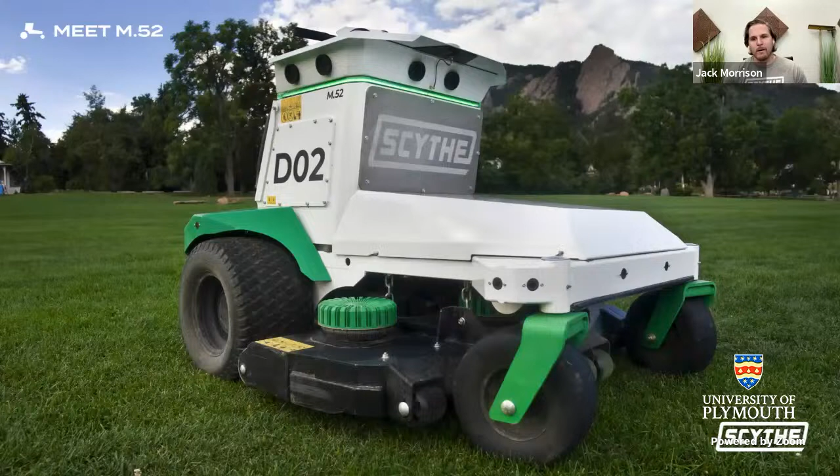So let me start by introducing you to M.52. Designed in-house and built from the ground up, M.52 is specifically capable of helping commercial landscapers who maintain these incredibly frequently visited outdoor spaces, like parks, HOAs, fields, schools, to get more done with the crews that they already have. It looks a lot like any other stand-on commercial mower that folks, especially here in the US, may have seen cruising around their housing development, office park, or school. It's got a 52-inch mowing deck on it, kind of the workhorse size machine in the US.

It's applicable to a broad set of use cases, from fields to apartment complexes, backyards, all of these different areas. It can mow well over 8 hours on a single overnight charge, and has this design that, like I said, is familiar to landscapers. They know how to hop right on it and start mowing manually or autonomously with a really simple, intuitive user interface. Now, M.52, of course, the big value here is it mowing on its own.

It uses a combination of computer vision, machine learning, and a whole bunch of robotics approaches to identify and navigate around obstacles, to plan its path around a mowing area, and to help landscapers not have to think about mowing while they go do the rest of the work on a property. It'll stop for people and pets, but go around trees and poles, enabling landscapers to just get more done.

That's really what it comes down to. Our job is to help landscapers save time. We want M.52 to take care of the mowing so that the crews are freed up to perform the more complex, higher value tasks on site—edging, trimming, picking up trash, planting flowers, dealing with the hedges. These are all the things that make a property shine and let landscapers show off their abilities, doing the more human part of the job of crafting a great space rather than just turning tall grass into short grass. Mowing is boring, frankly. We should have robots do it instead.

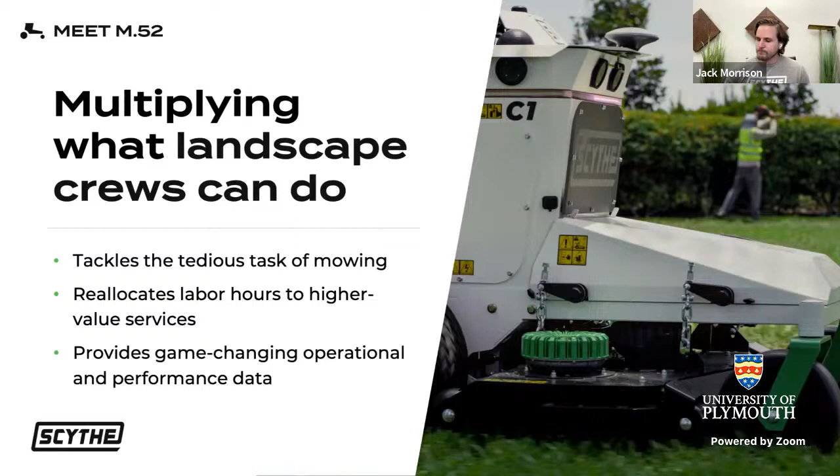Now I'm going to skip to a little video to introduce M.52, because robot videos are way more interesting than me talking, and then we'll get back into it after this.

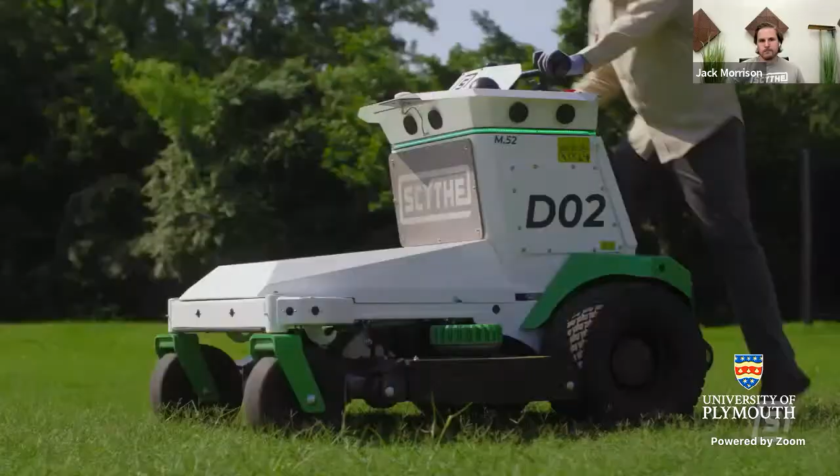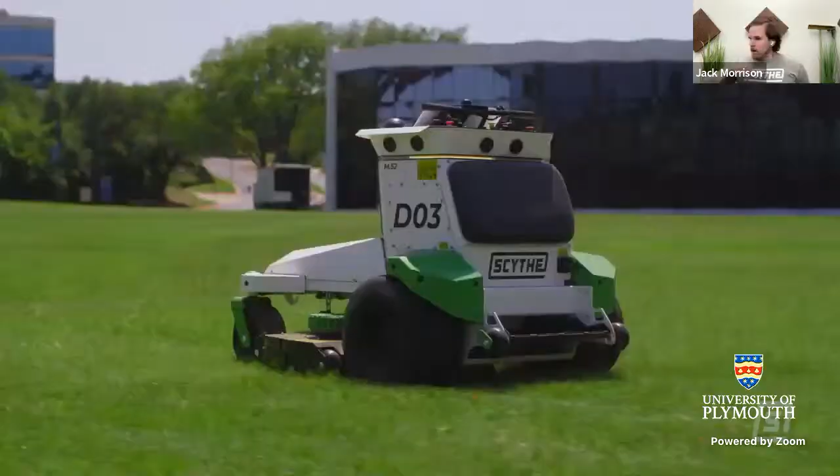Say hello to the next generation of mowing, built by Scythe. Say hello to M.52, the industry's most advanced autonomous commercial mower. M.52 is smarter than ever. An improved sensor suite and advanced AI allow it to see and perform like a human operator. Now your crew can finally focus on the higher value tasks that leave properties looking their best. It's important for us to stay innovative because it gives us a chance to really maximize what we're able to do on a property, to help with the efficiency and the quality of work we can give our clients, along with maximizing the volume we can handle in a day.

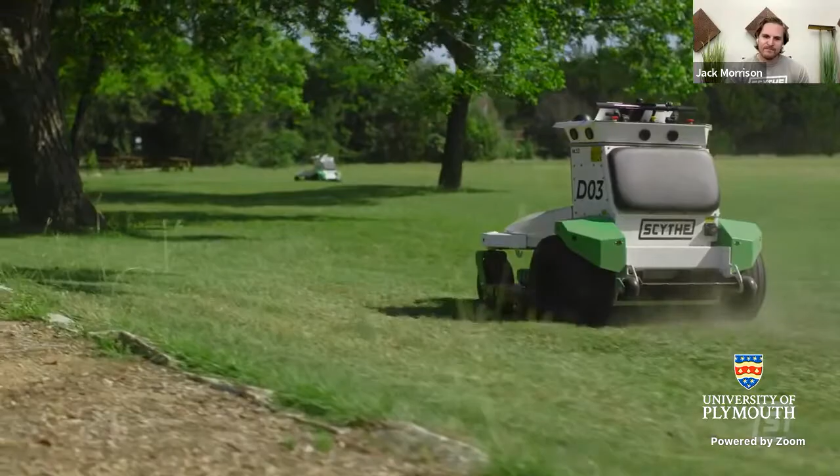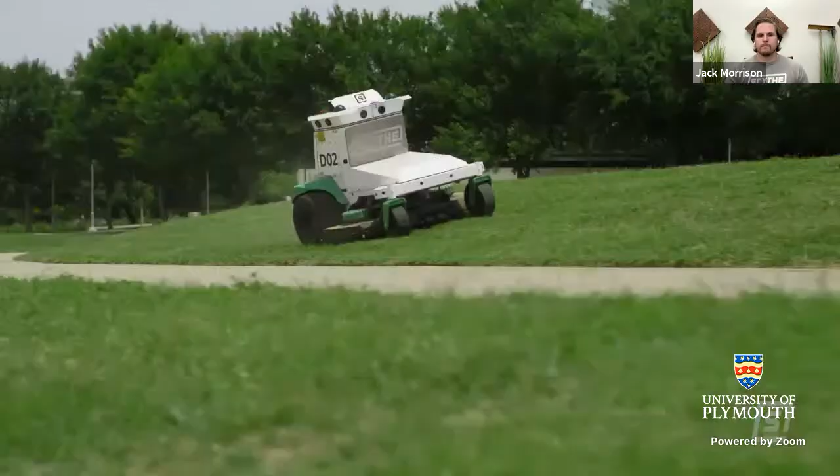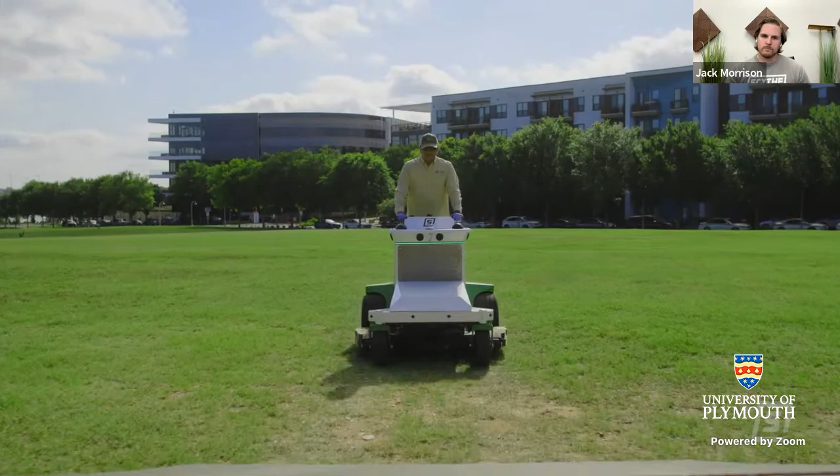M.52 navigates complex properties like a seasoned pro. It handles contours, tackles slopes, and automatically adjusts mow patterns to deliver your customers a cut above the rest. An all-electric drivetrain keeps it out of the shop and in the field—no fuel, no maintenance, no downtime. Using Scythe robotic mowers is allowing us to do more volume of properties because our guys can finish the detailed work a lot faster and move to another property. This new era of mowing means doing more with the crew you've got. It means all-day power without pollution, and above all, it means a perfect cut every time. Mow more with the next generation of Scythe.

All right, so there we have it. That is M.52, the lightning introduction to it.

The last piece before we get into the tech part is that the point of building a robot is to get lots of them out there and help do more. To do that, you have to take into account how you bill for the robot. Selling a multi-$100,000 autonomous mower wouldn't be very useful because not many landscapers could afford that. When we talked to a lot of landscapers and heard how they felt about their mowers, one of the things we heard over and over was that they were sick of paying to fix machines that would just keep breaking, and tired of becoming what they called iron collectors instead of focusing on their real work.

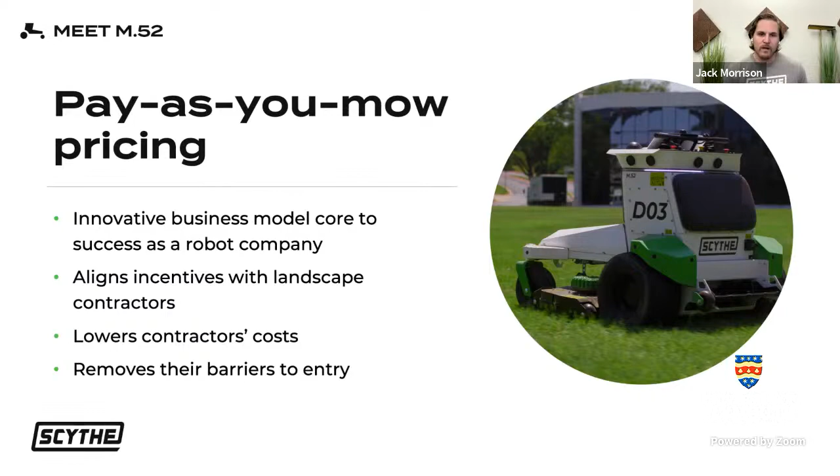They end up with these scrap heaps filled with mowers, parts of mowers, and entire mowers after only a couple of years because existing gas mowers break down so much. It occurred to us that all of these innovations in M.52 also unlock a better way to bill. We heard our customers' pain points and turned the industry's traditional—and we feel strongly misaligned—parts and service model inside out. So instead of charging customers when a machine breaks, every time the belt breaks or the engine needs an overhaul, we bill based on the work that's actually getting done out in the field. For every acre M.52 mows autonomously for a customer, we aggregate those over a couple of weeks and bill based on how many acres the machine mows. That builds a much deeper, trusting relationship that's vital for introducing something new and innovative into a word-of-mouth legacy industry like landscaping.

To build a machine that can stand up to the demands of commercial mowing and the high expectations of our customers, we had to design for critical considerations and constraints these robots face in unstructured outdoor environments. This includes the durability demands that influence our hardware design decisions, the dynamic and dirty environment that influences sensor choices and our perception development strategy, and the power limitations that influenced our approach to computation, from the processors and boards we use to the programming language for our software.

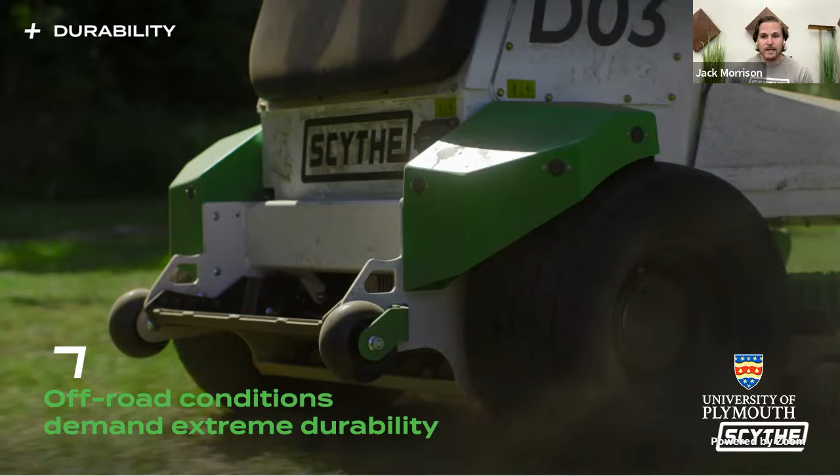So we'll kick it off with durability. The challenge here is that off-road robots have to be rugged enough to stand up to both their outdoor environments and the tasks they're doing. They face tough terrain, steep slopes, intense and variable weather, and the stress of daily operations, being a machine that's not only driving itself autonomously, where we have some ability to be gentler and optimize for the lifetime of it, but also doing manual operations.

Landscapers are not kind to their equipment. They've got a job to get done and don't really care if the machine can't hold up to it. They've got to go fast and get it done. These machines face uneven land, hidden rocks, even different types of grass that can wear on machines differently. Sandier soils will wear down mowing decks really quickly, for instance.

Incredibly hot sun out there, 100+ degree Fahrenheit temps, over 40 degrees Celsius. Unexpected downpours that will flood everything around it, tons of mud. They've got to get on and off trailers repeatedly, up and over curbs, and all around the properties they're operating on.

Now, of course, this isn't exclusive to autonomous machines. This is something existing gas mowers have to deal with as well, and they just don't really do all that well, frankly. Sort of surprising to us. A commercial mower, for context, can cost up to $25,000 off the lot. They only last a couple years, maybe 3 years max, 2,500 hours of runtime.

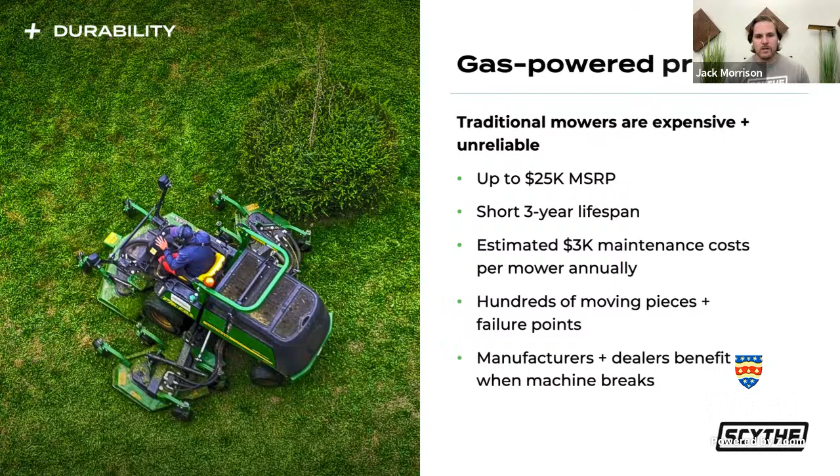And that felt wrong to us, so we wanted to change that. Going electric is one way we have completely flipped the game here. We've got about 1/10 the moving parts. We've got 3 blade motors, 2 drive motors, and the deck goes up and down. That's about all the moving parts, along with the casters on our machine. Almost none of that needs ongoing maintenance.

We've seen in the automotive space how incredibly robust, durable, and maintenance-free EVs can be. I've got an electric vehicle, and I think I've taken it to the shop once in 3 years. It's pretty incredible compared to the gas car I had that had to go in every 6 months, probably.

So just going electric allows us to avoid a whole bunch of the durability problems that would slow down our robots, keep them out of the field, and make it harder for our customers to get more done. Now, this isn't possible in every autonomous off-road application, since many need all the power and runtime a gas engine can bring in terms of quickly refueling. But it's something I'd strongly suggest folks consider as you look at taking an autonomous solution off-road, because the durability is so much better.

And then there's this climate angle of just being better for the earth. If we're building these machines to do things off-road and exist out in the field, we want to help be good stewards of that space, and eliminating emissions is a great start to that.

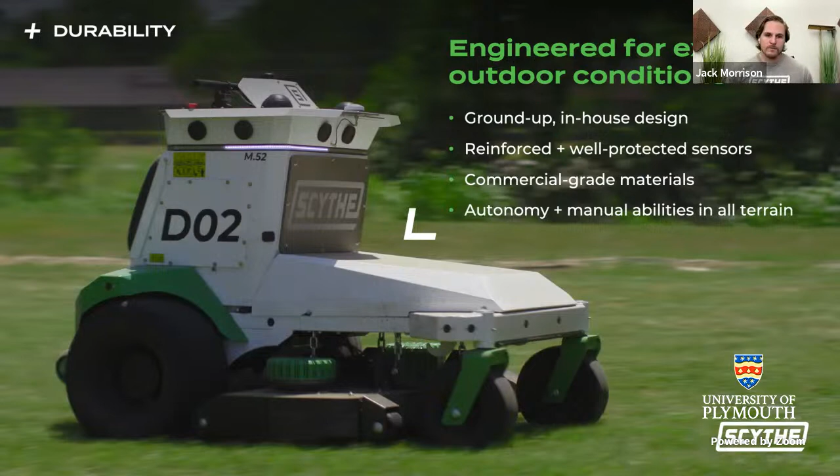We use what we consider commercial grade materials, really thick steel that can last through all of these environments. And then, we want to build a machine, and we test that the machine can do its autonomy and its manual abilities across all sorts of terrain that our customers might encounter.

And of course, when you're considering durability out in the field, testing is a critical part of maximizing that ruggedness for any off-road robot. In order to build a machine that before we fielded it was ready for the rigors of commercial landscaping, we've put it through some pretty extreme environmental testing to ensure it will stand up to the task at hand. This includes extreme terrain testing, accelerated lifetime testing, thermal and environmental testing, like soaking these machines to make sure that they really are water resistant, and then pointed tests to look at individual possible points of failure on the machine and make sure that we've covered them to the extent that we expect them to see anything out in the field.

We've made some design choices early on, built on best practices to help these machines from the time they're built survive out there, meeting IP66 standards to prevent dust and water ingress, using networking standards inside the machine for data transmission, like for the cameras, FPD Link or GMSL instead of USB or Ethernet. These are automotive grade camera streaming protocols that rely on really well-tested coaxial cables and are incredibly robust to noise and to all of the sorts of things that happen in an industrial machine.

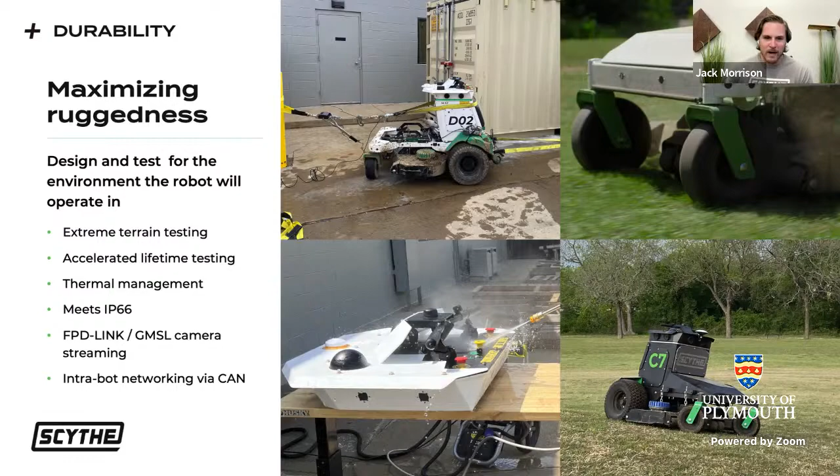All right, so the second consideration I've got here is around sensor selection and perception strategy in these unstructured outdoor off-road environments. Of course, your machine has to be able to understand what's around it and do that really robustly to operate safely in off-road environments.

And the challenge is that outdoor environments are not sitting still. They're dynamic, they're dirty. Nature's always changing. The trees are growing, the branches are waving, leaves fall, colors transition, water shows up, and then sometimes it goes away. And we need sensors that work in all of these possible operating conditions, including those with pretty stark lighting differences, dusty or grass-filled air, and abundant dynamic obstacles.

So to perform in these conditions, our real-time live perception is a must-have, right? You can't offload this compute to the cloud because you'll never have a reliable and timely enough connection to do this. So all of our compute runs on the bots onboard, and things like persistent pre-mapping, like what's often used for autonomous on-road vehicles, just isn't nearly as effective because these outdoor landscapes are always changing. It's not like we have static buildings that we can map against.

Trees are being trimmed, especially in landscaping. Branches are growing, leaves are falling. All of these things mean we need to deal in the perception domain with changing things as they come up.

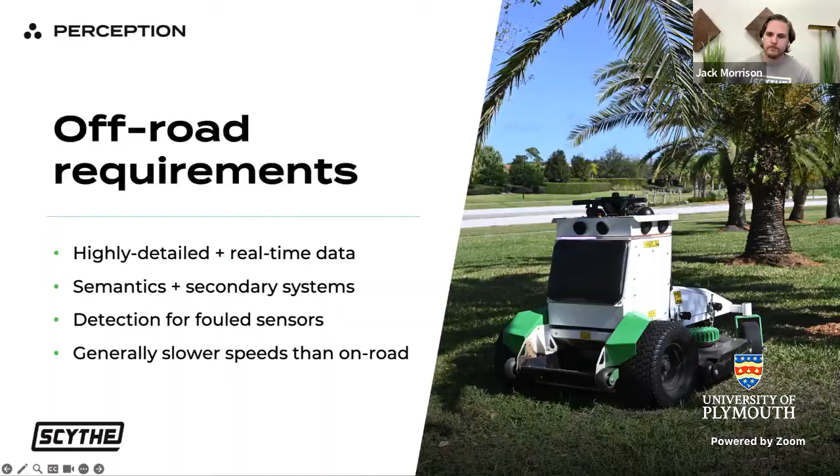We found computer vision to be the most productive and beneficial approach for perception on M.52. But we considered others. We've got 8 high dynamic range cameras on this machine. It performs really well for us because it can be really resistant or robust to fouling, like dust in the air, dirt flying around, grass getting clipped, and from a cost perspective is much more appropriate for the type of machine we're building. This is not something we want to cost hundreds of thousands of dollars to build.

Even the cheapest LiDARs today can be $10,000 plus for the rich geometric information you want from an autonomous mobile robot. Whereas our cameras cost a fraction of that for all of them combined, and provide us not only structural data through geometric computer vision methods, but also rich RGB information that can feed into all of our semantic perception abilities. And you can't just take any old cameras off the shelf.

In indoor environments, a 60 decibel dynamic range is typically okay—you have usually pretty uniform lighting. But if you think about being off-road and out in a tree-filled area, you can have really stark lighting differences, where you've got shadows that are incredibly dark, and then you're staring simultaneously right into the bright sun. That means you need incredibly high dynamic range cameras. Instead of 60 decibel dynamic ranges, our cameras have 100 to 120 decibel possible dynamic ranges, which allows us to resolve objects both in that sunlight and in that dark area simultaneously.

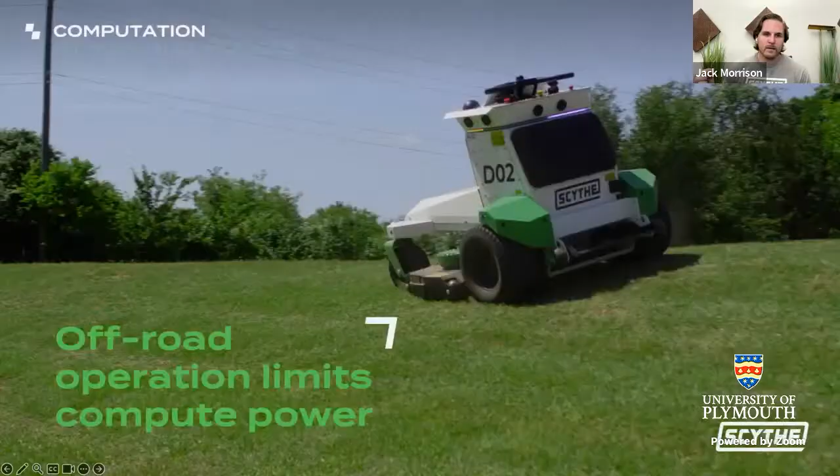And that compute power is pretty limited because of some of the demands around power budgets. We'll talk about this now. So we really had to tailor everything about our software processing to the task at hand. Not only the compute boards that we're using, the actual embedded computers, but also the software, to keep in mind the limits to the power that we've got.

These off-road applications can take an incredible amount of power to do the actual task at hand. If you're an indoor mobile robot, your power consumption is actually pretty light. You're on a relatively smooth floor, sort of moving yourself around, maybe operating a small robot arm if you're a mobile robot. But there's not a whole bunch of resistance to what you're doing.

When you're off-road, if you're doing things like cutting thick grass or harvesting or trenching or bulldozing, that uses an incredible amount of power just to do the task, not to mention actually computing all of the autonomy abilities that you have to enable to do that task.

There's also often a limited ability to charge nearby when you're off-road. Of course, there aren't outlets everywhere in a field. You can't sort of run a cable to it or do DC fast charge in the middle of a soccer field. And so that can be really challenging for emissions-free, fully electric machines to both be able to do the task at hand, do it all day, and meet their customers' needs while also being autonomous.

And so instead of packing some beefy desktop computers, off-road robots often need to make do with substantially lower power devices.

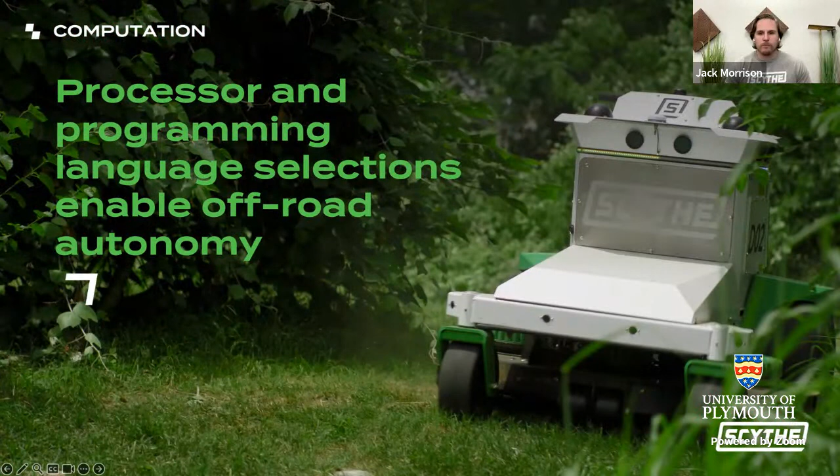All right, just wrapping up here, by being really strategic with your software processing and your programming language selections, we think off-road robots can be just as capable as indoor or on-road AVs in the autonomy space that they're operating. You just have to be really intentional and think ahead to cover all of that.

Now, I talked a lot about M.52 and what we're doing at Scythe, but I think there are amazing other opportunities for folks to build off-road applications, from agriculture to construction and mining to various types of off-road mobility. There's so many things and so many important applications that could use the help of autonomy that I'd encourage folks here to think how they can get involved and how they can bring more machines to these important areas of the economy and of the world that need help automating and getting more done with the people they already have.

Whether that's because they need to help people be safer in these environments. It's dull, it's dirty, it's dangerous. The 3Ds we all think of in robotics, so many different opportunities. They all have unique challenges for robots, but I think those challenges will really shape the solutions and the decisions that you make around things like hardware, perception systems, and computing to allow you to build better, more capable robots. We'd love to stay in touch with everybody here.

As part of that, we came across the Microtransat Challenge, which has been a long-running competition, I think going over 10 years now, for small autonomous sailboats to cross the Atlantic Ocean.

There's some rules to that. The boats have to be powered by sail, no engines or motors. They have to be less than 2 meters long. And in order to complete the fully autonomous category, they have to have no control signals after they cross the start line. There have been successes in the unmanned attempts where someone has remotely controlled the vessel across, but the fully autonomous category is still up for grabs.

Loads of people have entered, DIY enthusiasts, academic institutions, commercial institutions, and it turns out to be really damn hard to make a robot cross the Atlantic. So we were inspired to give it a go.

And so we started designing a boat. We made it all up in Fusion, 3D printed it in sections. We learned the joys of doing 12-hour prints and then having them fail right at the last moment and turn to spaghetti. And we found out about the painful process of hand wrapping fiberglass.

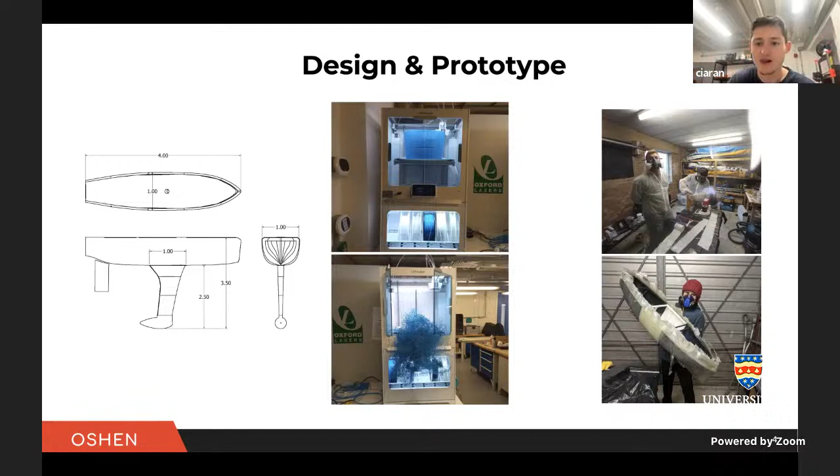Once we glued all these sections of the hull together, wrapped it in glass with some really nasty chemicals to put on that, we had a nice solid hull and gave it a lick of paint. And did some design of the interior parts.

As robots go, autonomous sailboats are super simple. There's only 2 real parts that have to move. You need to set your sail angle to the wind and you need to steer with your rudder. So we had some super simple parallel linkage, worm geared mechanisms set up to control those 2 parts.

We wrote some simple software just running off Arduino microcontrollers and gave it some tests on the local reservoir. And if this video is working okay, you'll see it sails super slowly, but kind of made it there.

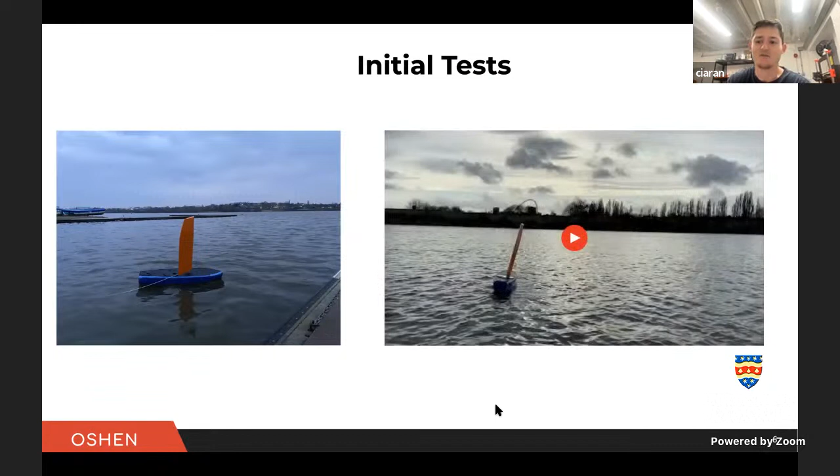You can see Wembley Stadium in the background, so we were quite pleased. We demonstrated a proof of concept, but we were pretty sure that this was not going to be crossing oceans anytime soon.

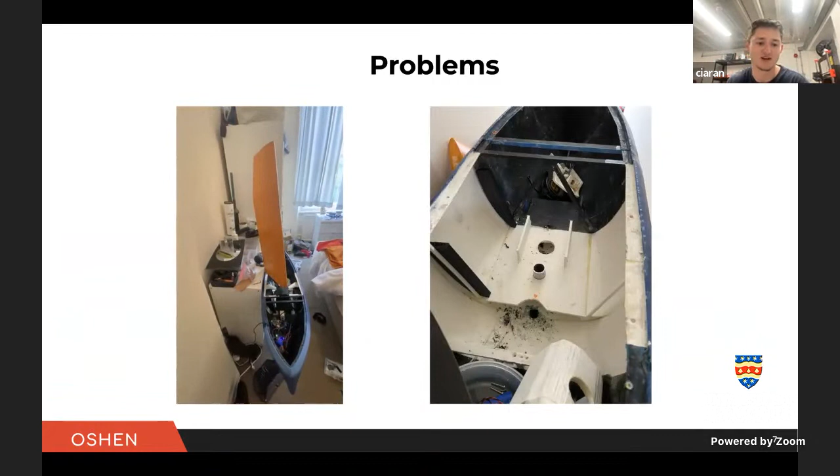Part of the issue was the weight of the thing. We left our 3D print inside this fiberglass outer, which made the sail incredibly heavy. Even with our 60-to-1 gear ratio on the motor, it just really struggled to turn that sail through the full range of motion. And the 3D alignment parts we had inside very quickly sheared and snapped off. So things broke pretty soon.

But we were inspired to give it a better go, iterate on that prototype, and still go for this Atlantic challenge.

It was around the same time that we also came across ocean data, types of data like metocean - things like wind, wave spectra, temperatures, pressures, weather effects - and then environmental data. You've got simple visual observations of the oceans, chemical sensing of the water, passive acoustic monitoring, things like that. And we found out that one of the main tools to actually get this ocean data was to use sensor buoys.

These are really simple passive devices, sensor payloads in a floating package. Right now you need to have a manned ship actually deploy these. They need to go out to an area of interest, drop them overboard, and then they'll last a few months in the area before they drift away with the ocean currents. So you get pretty poor coverage - these things will clump together, you'll have really sparse areas, and if you want persistent measurement in an area, these buoys will only last for a few months.

And the worst part of it is they're not recovered. So they go on to just litter the ocean, wash up on beaches, because it's too expensive to actually go and pick these things up.

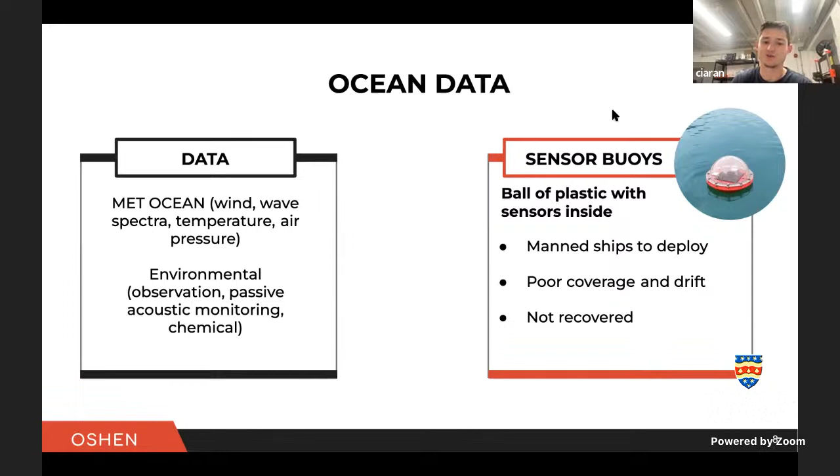And so we kind of realized there was an opportunity there to use these micro transat style vessels as ocean data collectors. We are not the first or anywhere near up there in making robot boats. Robot boats have been around for a while. But what you've got on the market today tend to be much larger autonomous ships, huge expensive assets with large power budgets and loads of expensive equipment on board. They're heavily regulated, have to be monitored by remote pilots, and they're just so expensive that you couldn't put them out in the same numbers as you do drifting buoys.

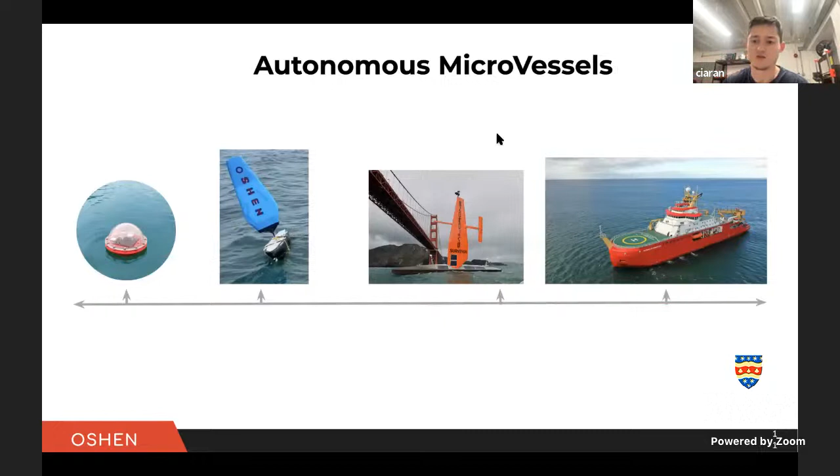And we want to design a system that is a lot more similar to your drifter than the research vessel. So the advantage of our system is that it could self-deploy. You could drop one of these things off on the coastline. Over many months it could find its way using just wind power to its destination, use the wind to stay in that area making measurements, until near the end of its life, at which point it'll be able to sail back for maintenance and won't pollute the ocean. The idea is that these are so small, only about 1 meter in length, that they could be deployed by a single person, and you could deploy them in large numbers.

At this point, we decided to move away from just doing the microtransat challenge as a project to going for things as a startup with more of a commercial aim. To start that off, we got some prize money from the enterprise lab at our university. We used this to grow the team a little bit, and we started iterating on new prototypes.

Importantly, we started going out to sea, which really put things through its paces compared to those reservoir tests. And we got things in up to a force 6 on the Beaufort scale, which was pretty nasty to be in on a chase boat.

One of the big things we did when we graduated is my co-founder and I put our savings for the year together and bought a small sailboat secondhand to both live on and be our base of operations for all the tech development.

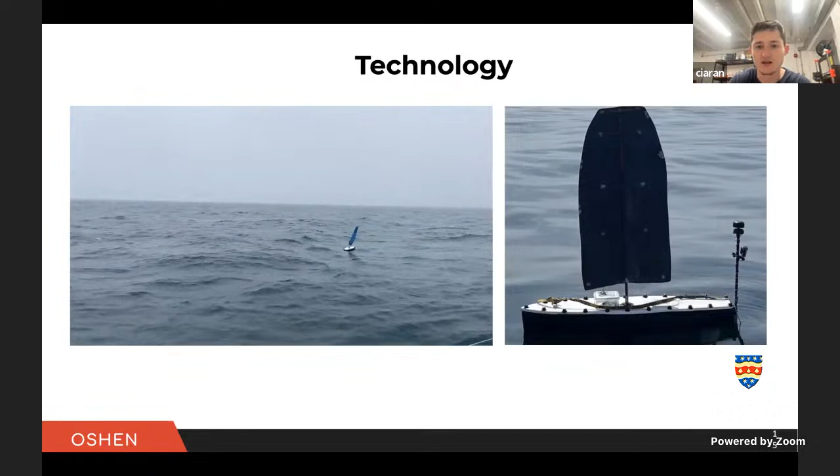What I'll do for the next part is I'll quickly go through the different aspects, and I'll leave it up to you guys to ask questions if you want me to elaborate more on certain parts.

So, chatting a little bit about some of the main challenges of making a sailing robot. On the face of it, as robots go, it's one of the simpler things you can make. There's only a couple of moving parts, and the sea is a particularly vast and empty space. You don't need advanced obstacle detection, SLAM, things like this. It's quite a simple environment as robots go to operate in. The challenges actually come in with making something that can last for many, many months consistently, confidently.

Part of that is in the power requirements. With the size of our vessel, we can realistically only have 40 to 60 watts of solar panel capacity on our deck, which really limits how much power we can use in our systems. That means the actuators controlling the sail and steering, being the most power hungry parts, we want to actuate as seldom as possible. So what we're trying to make is a system that is just controllable enough, that just barely gets where you want to go without using any more power than it absolutely has to. With the scales you're talking about on the ocean, things could be a few miles out - that's pretty good going in terms of getting to a destination, monitoring an area.

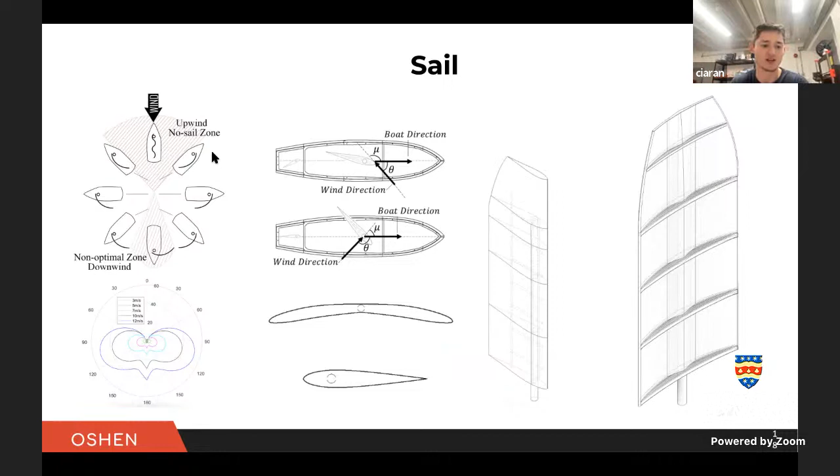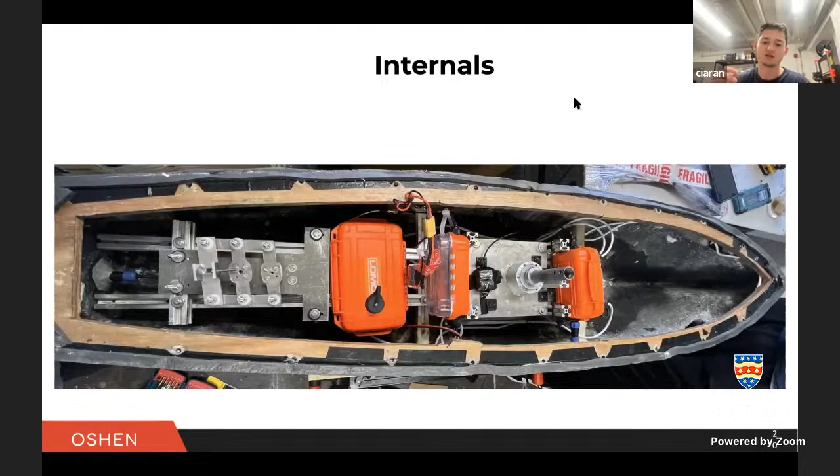Quick flow through of what the insides look like. We've got some metal frames this time, and the electronics are divided into 3 main modules, each enclosed in a waterproof shell, with further waterproofing inside that. Again, the 2 simple actuator systems that do the mast and the rudder. The microcontroller we're using is one of the STM32 ultra low power range - this thing draws almost nothing. It's absolutely crazy, in standby mode you're talking like nanoamps.

It's got a whole bunch of hardware timers, so you can put the thing in sleep and it will wake itself up when you have certain interrupts or after certain times. Importantly, it has 5 serial ports, which really helps when we've got all of our different sensors, most of which use UART. It's got built-in timers.

I love the watchdog feature. It's a fantastic thing to put in any project you're doing. If the watchdog isn't petted, it will reset the whole system, turn it off and back on again. And everything's built around a real-time operating system, so you've got all the different concurrent processes going on between the control system, reading the sensors, etc.

The 3 key sensors you'd find in an autonomous sailboat are knowledge of the wind strength and direction. So you've got your anemometer—we've got an ultrasonic one here, super expensive but quite robust kit. You've got some way to measure your heading, so you can use an IMU for that.

And we've actually been trying RTK GPS in a moving base mode. If you're not aware of what RTK GPS is, it's basically super accurate correction data applied to GPS.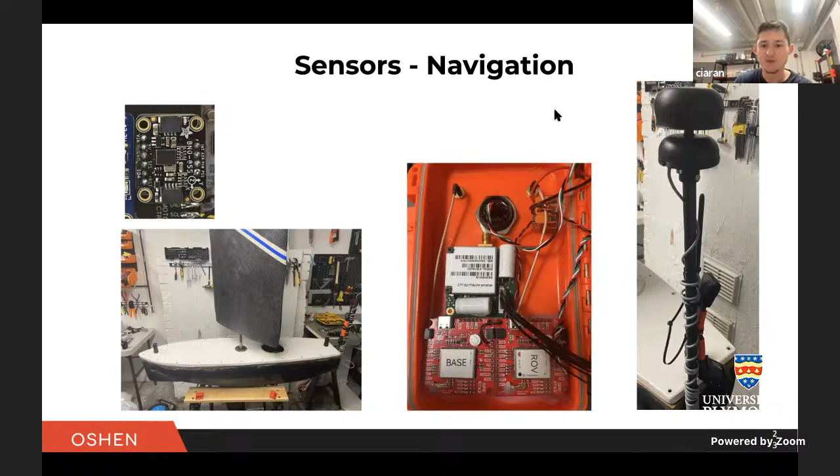And then the third part of things is your GPS, obviously, just your position in space. So those are the core navigation sensors.

And then we've also got our data sensors. Important things are our temperature and pressure probes, which measure the surface temperature, subsea temperature, air pressure, and humidity.

Our grant funding most recently is for this project where we're doing passive acoustic monitoring. We've put these hydrophone underwater microphones on our keel, and we're listening out for cetaceans—dolphins, porpoises, things like that—and logging that data.

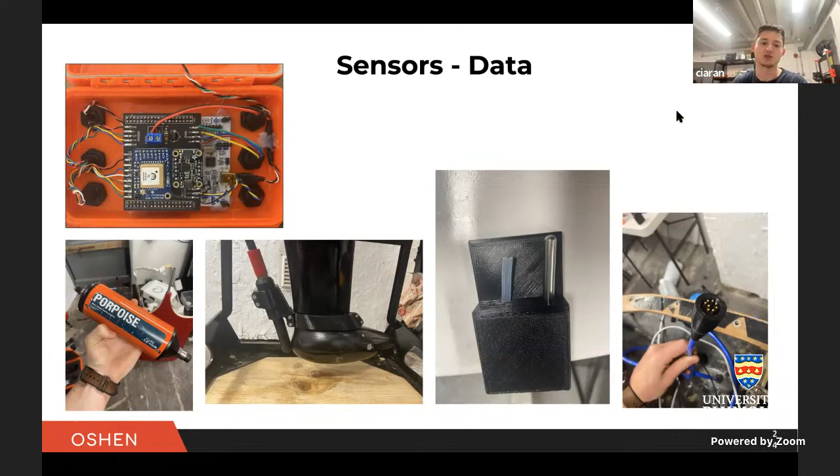And we've also got our IMU on there using that accelerometer data to measure wave profiles. These are super valuable to people running commercial shipping and offshore industry—they want to know exactly what the wave frequencies and wave heights are.

A little bit about the stability and robustness considerations. So everything's mega waterproofed. This is the chip that we actually plucked out of one of our vessels. This was inside one of the waterproof enclosures, inside the waterproof hull, and it never got even close to water, but the humid, salty air has managed to corrode all the terminals. So yeah, the sea is a pretty nasty place, and there's lots of considerations that go into sealing and waterproofing things.

A little bit about the stability considerations as well. There was a lot that went into the physical design of the boat. The simple one is the roll stability—the lead keel on the bottom makes sure that it always stays upright, so if it capsizes, it'll always find its way back upright.

What's a bit more complicated is the yaw stability. You've got to look at the aerodynamic and hydrodynamic forces acting on the vessel, essentially trying to make it stay in a straight line as much as possible by itself.

Okay, a little bit on the control system side of things. This came out of my co-founder's master's thesis. She was looking at applying standard algorithms like A* with a custom cost function to find the optimal path from A to B in the oceans.

Obviously, such a small vessel is going to be affected by the wind and the currents, so you have to make sure they're acting with you to get you where you want to go, avoiding particularly turbulent areas of the ocean. This happens offline, generates a series of waypoints, which can then be fed into the next stage of the vessel control.

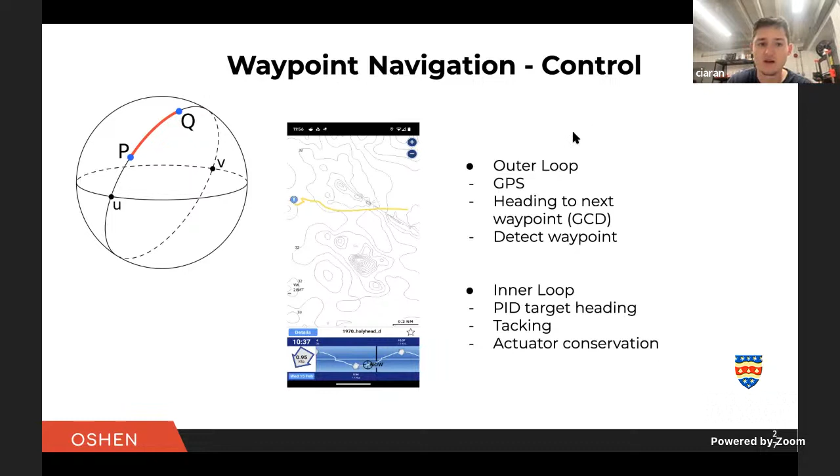Next up's the power system. We're trying to run such an incredibly low power system, our target is about 3 watts. The biggest consumers of energy are the motors in the mast and the rudder, so we're trying to actuate them as little as possible, which means trying to design a vessel that's just inherently as stable as it can be.

We have capacity just now for about 40 watts of solar energy, which means that assuming about 2 hours peak per day, we can just about get in what we put out. We've also got a really large set of battery packs that mean we could keep going for a week without any solar energy.

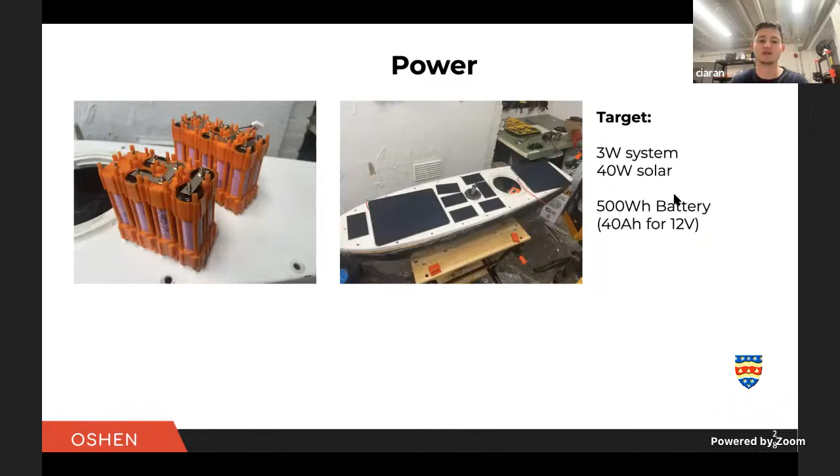A quick note on the telemetry. There's 2 sides of this. One part is about getting the data back, we're using Iridium SBD for this. If anyone's used that before, you know it's really small message sizes, you're talking about sending under a kilobyte. There's about 5 minutes latency on it as well, and it's quite expensive to send messages, so it's really not ideal for debugging the system.

We've built a dashboard that integrates with the SBD messages and will display the data and the position of the vessel. For the debugging side of things, we've got a LoRa link, sending as much information as it can on the internal status of the system, any warning messages, things like that. The LoRa has a range at sea of just under 10 kilometers.

So you can be on your chase boat, you might not even be able to see the vessel, but you can get information back about what's going on. And we've got a little relay station that we've built that just translates the LoRa information over a Bluetooth link, which means you can connect using your phone.

Up ahead, we've got plans for our first Beyond Line of Sight mission this month, which is a bit scary, sending her over the horizon, but it's what she's built for, and looking forward to seeing how it goes. Next month, we have our passive acoustic demo.

This is the end of our grant funding, and we're going to send it into an area well known for dolphin populations and see what we can pick up. We're quite optimistic because our vessel is sail powered, it should be super quiet compared to other solutions in powered vessels that are obviously going to interfere with the dolphin sounds.

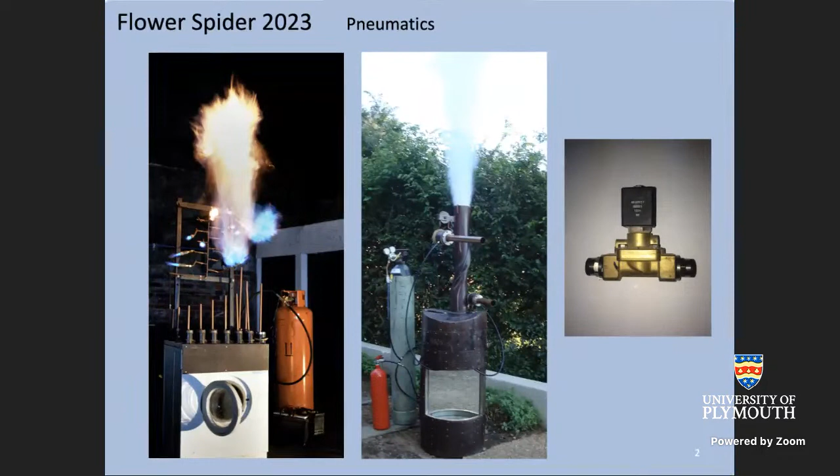The idea came to me, which was to create an autonomous moving floral animal. I really liked Jeff Koons' piece, but I thought it would be cool if it could move. And then I also thought it would be very cool if it could actually walk rather than just move.

So the idea was, okay cool, it's going to be a moving floral animal. It's going to go global, visit botanical gardens and parks globally, and be able to wear suits that have been grown for it locally wherever it went. The idea behind that is to bring awareness to the edge of nature and engineering and the way we interact with the web of life. But also there's a secondary thing, which is to inspire and educate around maths, electronics, programming, and art. I left robotics out of that stage because I wasn't really aware of robotics, as will become clear.

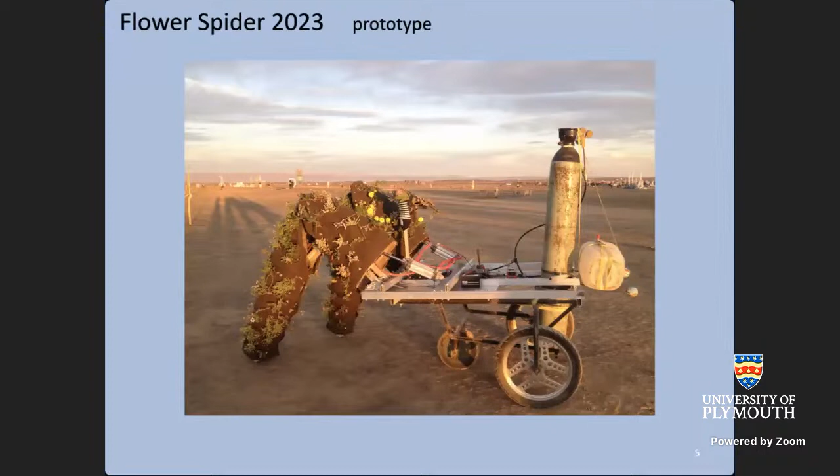So then I got a bit more serious, and I started to build the spider up towards mechanically what it would look like today. That was drawing on my engineering background, and it went quite successfully. I got it to this stage.

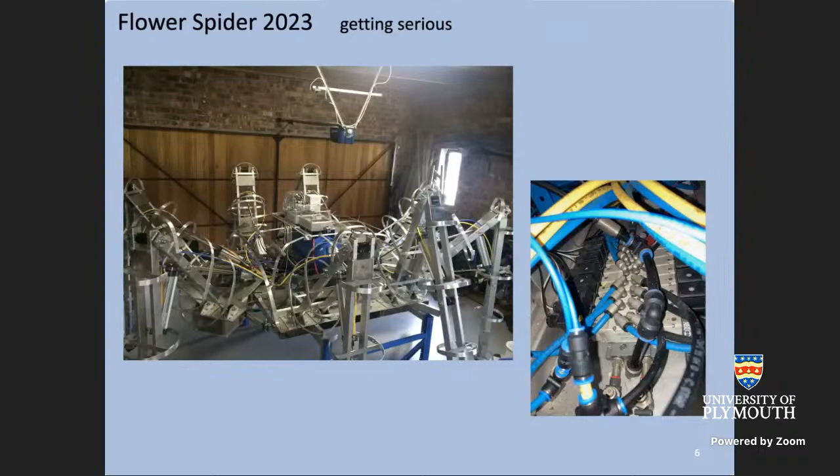Mechanically, it was running really well, and it could move in the way that I wanted it to move. The pneumatics worked. I put pulse width modulation control through a couple of Mega 2560 chips on a custom double Arduino, because one Arduino couldn't do what I wanted. I ended up with this complete spider, which mechanically, and from a gait perspective, could do what I wanted in terms of walking.

It could be covered with these suits, which I was growing at the same time, and bingo, there's effectively the finished product. And great, what I had planned...

Was, okay, mechanically this thing's working, the suits are good, so basically I just need to pull out an Arduino, and it should take about a weekend. Got a whole weekend free, kids go off somewhere else, got a few beers in, and by Monday this thing should be walking out of my garage, based on previous experience.

So it was a pretty tough weekend, where I realized that I had in fact overlooked the entire field of robotics somehow, and that there was going to be a long journey ahead, and that the sequential synchronized approach to life was effectively an automaton which was not going to walk. So that was quite sobering.

So I didn't give up. I started learning ROS 1, Gazebo Classic, working through SDFs and URDFs, mainly through the construct, which was a learning resource I used at that stage, which was very helpful in getting me through the early stages of learning about robotics. And then I realized that I needed to have sensing in place.

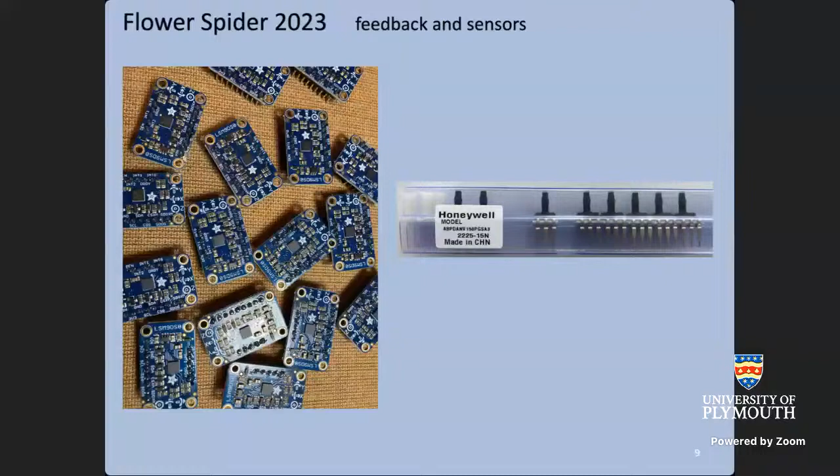So, knowing that, I then realized that each cylinder would have to have two pressure sensors on either side of it, to determine what the force was, and then what delta force I'd have to apply to get it to move in the way that I wanted. So that was slightly irritating, or not irritating, but again, a learning journey.

So I moved on to the practical sensor implementation piece. I put 42 sensors all over each individual link of the robot, and I then worked with a pressure sensor manifold, a whole bunch of those, another 42 odd. That was particularly painful because of the voltage characteristics of the pneumatic sensors. Another part of what I've experienced is that I have to work with what's practically available, and what was practically available happened to be these Honeywell ones at a reasonable price.

They're certainly not top range ones because that would cost a fortune, but there was going to be a voltage differential, which I thought was going to be fine, but a logic level converter issue cost me 6 months of my time just trying to work out what was going on, just because it was a Texas Instrument logic level converter that couldn't push enough current through to the pressure sensors.

So again, a kind of learning journey as you go. Very difficult to find online resources that can help me with what I want to do. But building up all of this great knowledge and getting to a place where I can move forward in a good way. So where is it now?

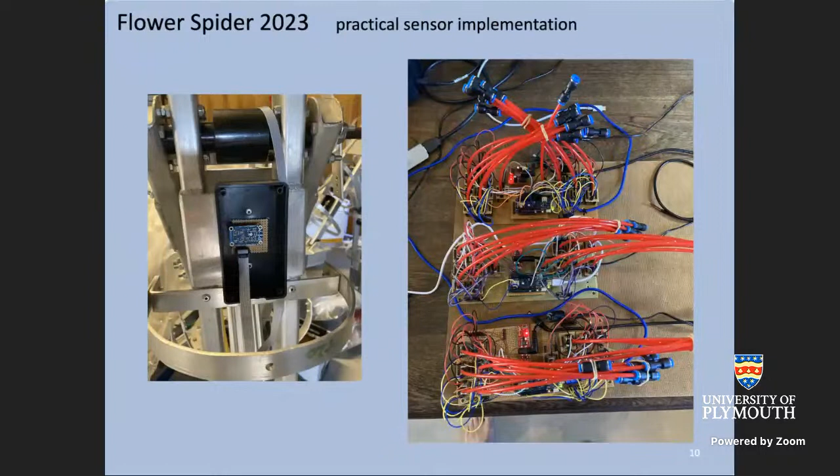I've implemented serial interfaces to the entirety of the sensing system. I'm using mainly Arduino-based microprocessors. Those are all onto ROS2 nodes, and they've got a ROS2 environment running onto an Intel NUC. You've got the whole pub/sub type setup there, mapping nodes, doing messages and topics implemented for the model and the live environments. I've got, I learned about Gazebo Ignition again.

Gazebo Classic was a tough call back then. It was easier this time around, but unfortunately closed form or closed loop kinematics aren't on Gazebo Ignition at this stage, which was very sad because it was on Gazebo Classic, and this entire robot works off that type of closed loop kinematics. So yeah, another little road bump, and then loading it up onto RViz2 to effectively get a visual on what's actually going on there. And so that's the state it is at the moment.

Effectively, this afternoon was putting in a noise filter on the orientation sensors because the orientation sensors in Ignition were creating unexpected noise. I thought it was going to be quite pure, but it wasn't. Next up is SDF modifications to work with the weight distribution, because there's a lot of stuff on the Spider which is not equally spread across various links. So I want to ensure that's working properly before I start to do the gait testing.

And then the big issue, which I guess I'm going to need some help with, I'm going to have a crack at it myself, is the pneumatic or pneumo plugins here, where I've got cylinders on the Spider and the nature of the force they apply, and how that is static or there's friction on them, and how it applies force, and also to what extent an incremental opening of a solenoid valve creates force on the Spider. That's all going to need to be worked out with an efficient pneumatic cylinder plugin. I haven't found anything online, and I'm going to give it a crack myself first, so I frame the problem.

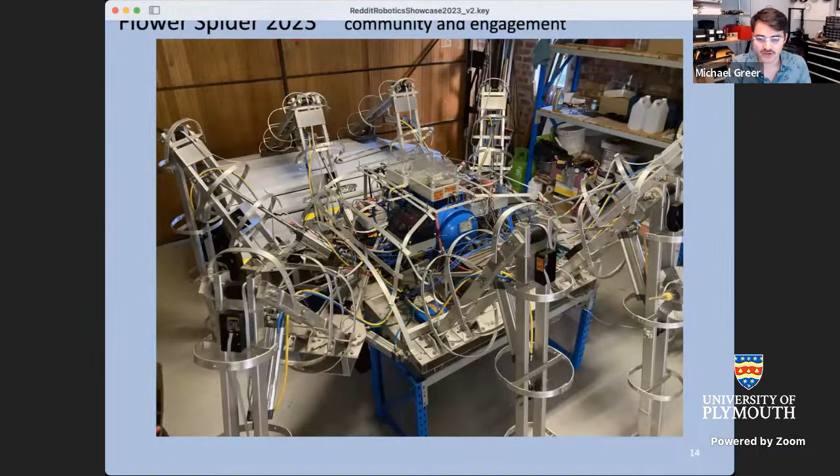Yeah, I think part of the journey was being able to get to a place where I could articulate the problems I'm having in a professional environment in a way that I could get a useful response, rather than just throwing out questions that no one understood. That's kind of the first step of the problem, unfortunately, knowing what you don't know, right? Yeah, I'm still learning what I don't know.

It's really fun seeing that learning process in your presentation. A lot of us come from an engineering background, so we kind of have that intuitively, but seeing that process documented is really cool.

We have a quick question from the YouTube live stream: have you thought about putting pressure sensors on the feet so that it could maybe someday handle walking on not completely flat surfaces, being able to sense where it's walking?

That's kind of the next step. The approach at the moment is to position the foot where the flat surface is expected to be, then apply force such that, based on the cylinder pressures, that leg is applying 50 kilos of force to the ground. So putting a pressure pad at that point would be the next thing I would do.

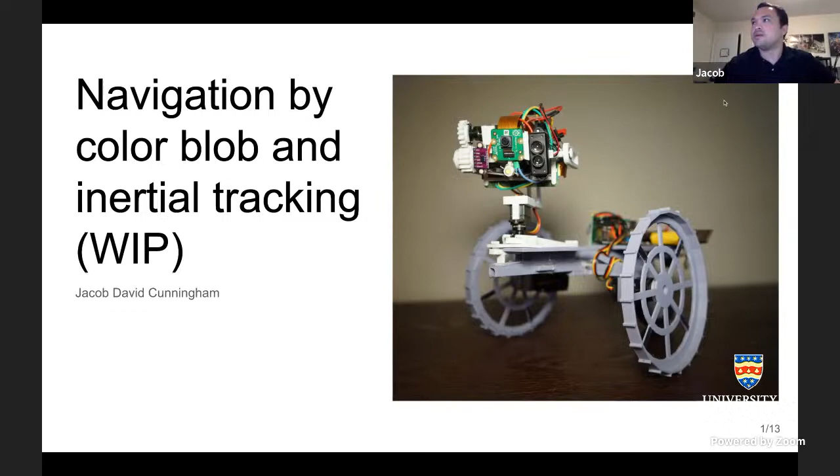This one's trying to do room navigation. I started out with a version where it had a camera, a LiDAR, and an ultrasonic sensor that would point. This one was a bad design because of the stiff wires, so it was hard to aim it and have it recenter. Originally it was designed for these round steppers, but you just go in a direction, you don't have positioning without some kind of encoder or something.

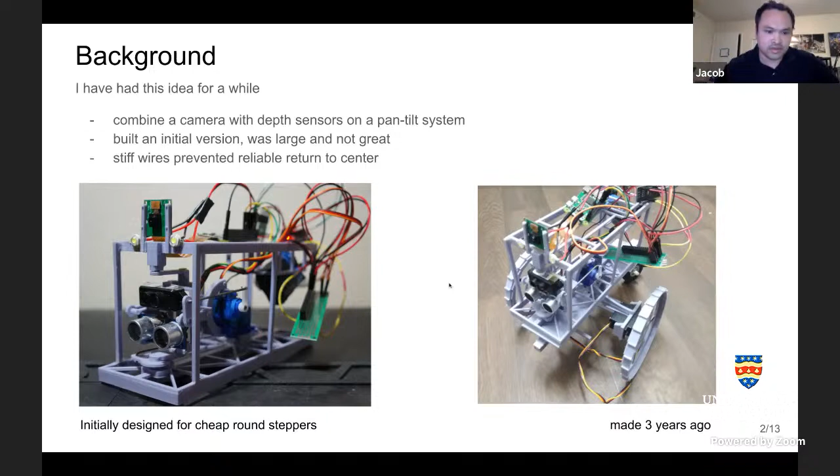So I built this thing and started to get all the parts working, talking to each other, figuring out how to pull information. I also started mapping things in 3D using Three.js, plotting points in space to get an idea of where things are.

Then I wanted to make that smaller and more compact, so I designed this thing that fits like a Pi Zero. There's an IMU at the center of all the axes, and the two depth sensors are there, with the camera in the middle. The entire thing pan tilts. I had to design that, then solder everything together and get it working.

I was having problems with the I2C working on separate channels, so I put everything on the same one, and ended up swapping out the 6050 for the 9250, the 9-axis one, which was bad because it's bigger, so I had to get it in there by breaking stuff, so it's a little wobbly. And then the camera, I didn't realize I'd have to flip it upside down because of the ribbon cable or flat connector or whatever.

And then it's a separate unit, so this robot here is electrically separated, a different system. It uses a WebSocket to control it. So this is just like a brain that scans and then tells it where to go.

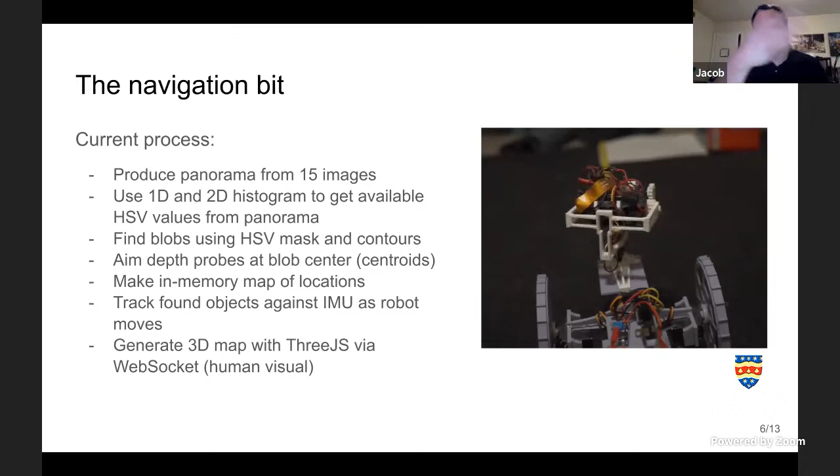But there's always a way to find the cross by sampling the slope and finding an intercept.

It's really cool, like if you had a panorama and you knew where the center was, but this is the way I found to make it work.

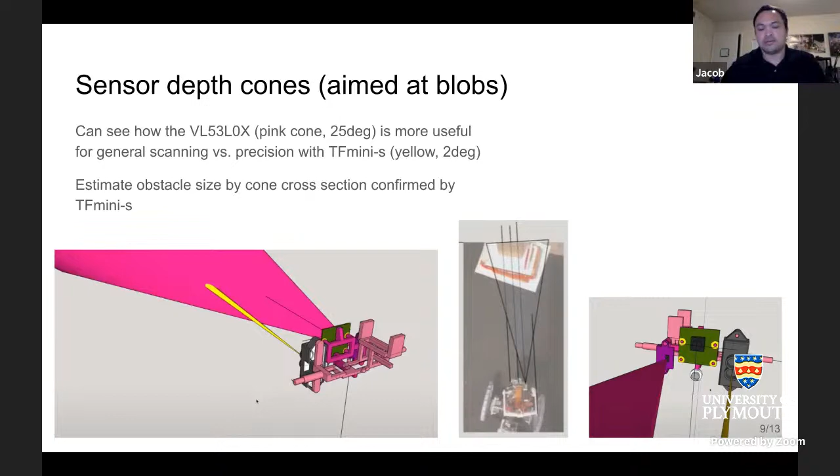See, you got 5 minutes, okay.

And then just IMUs - so far I've only done dead reckoning and estimation of displacement and rotation. That's what's determining the angles of the servos and where it's looking. Of course that's not as guaranteed as mechanical encoders or something, but that's what I wanted - a thing that just relied on the IMU for the positioning.

This is information on Three.js. This is another robot I made where it uses that same idea, a single beam, and it's wiggling the entire body to make a depth map like this, which is terrible because you're moving 12 servos versus 2. Ideally you'd use one of those lidars where it generates a giant point cloud or whatever.

And you can import 3D models in Three.js, so you can build a simulator, move individual parts and all that. So that's pretty cool.

This project has problems - you don't know how big something is in a picture, it's like perspective.

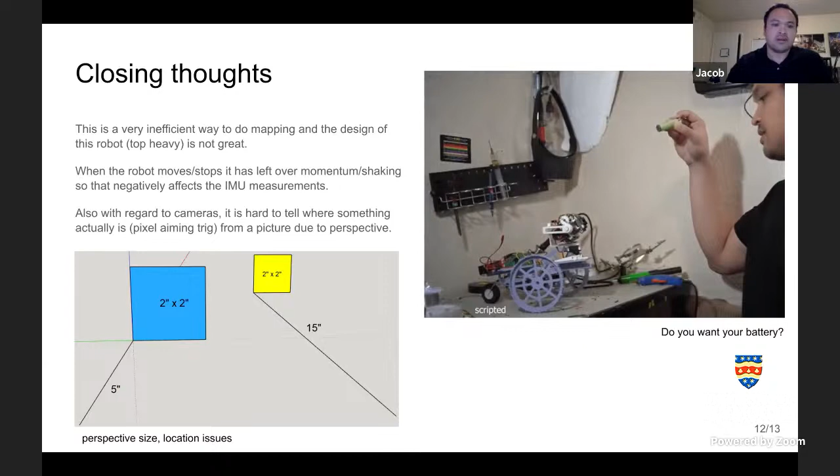And if you want to see more of it, there's the links.

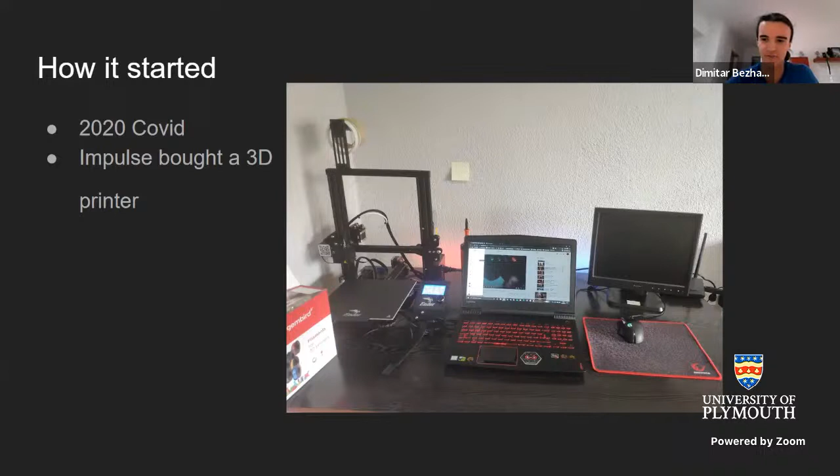So how did this all start? It was back in COVID in 2020 when we all got locked up, and something weird happened. I suddenly had an urge to buy a 3D printer, and it turned out to be one of the best choices I've ever made. It turned out to be a very nice hobby.

This is the previous robot I made. I'll later showcase the current one. It's basically a 3D printed robot, not very well polished. It was like a first attempt at combining all of my skills with electronics and stuff. I just wanted to add more and more features to it. I didn't have any certain tasks I wanted to accomplish, I just wanted to add more features and try out things.

So I found a huge laser that I kind of overvolted, and it turned out to look like a lightsaber at the end. That was very interesting to do.

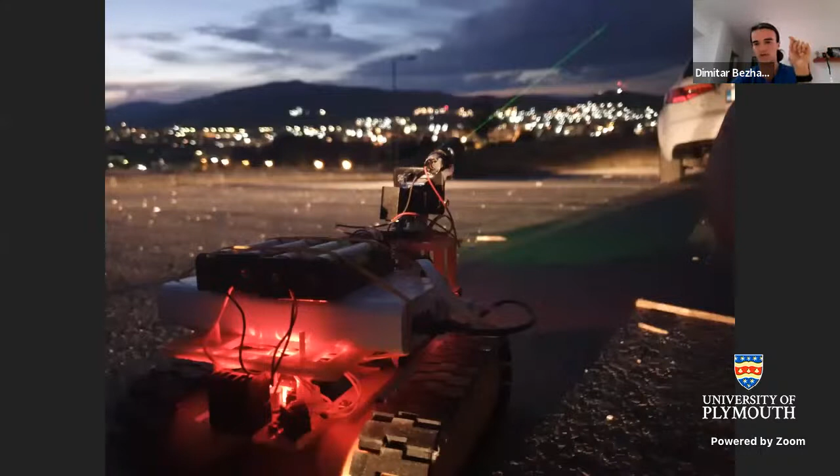Here's another showcase of the robot, which has a Raspberry Pi on it. I used the Viola-Jones algorithm with OpenCV for face detection. I'll play the video intro here, this is for the previous robot. As soon as it detects your face, it puts a square on it, and depending on the size of your face, if it's close to the camera or far, there are two thresholds that determine if the robot should move forward or backward.

Basically, that was my goal for this thing to be somehow autonomous without any machine learning skills, because I did not have any ML skills back then. And that is the showcase for this robot. Let's go to another slide.

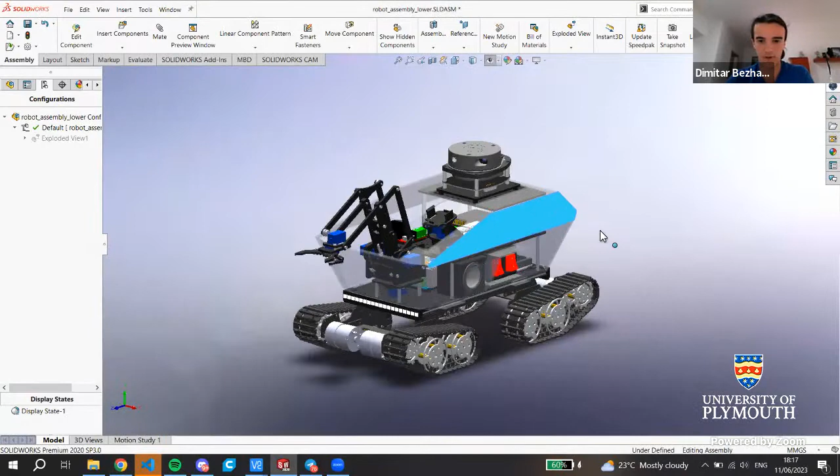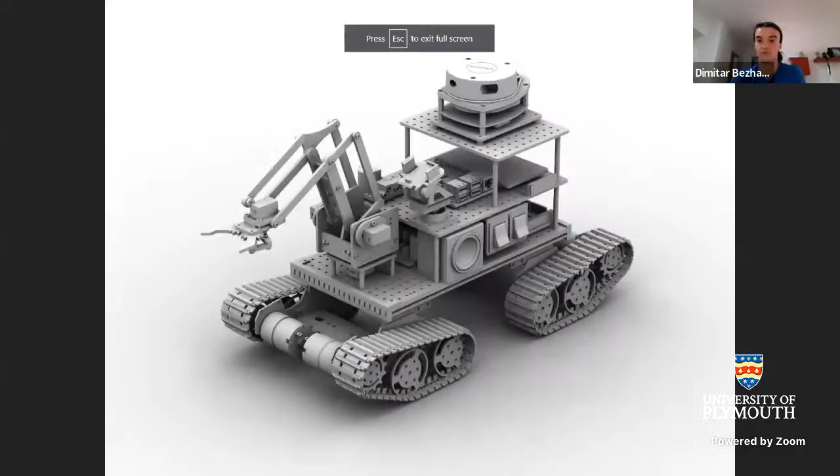So it was like a huge overhead to think always in the future with this project. I wanted to learn or improve these skill sets like CAD design. I used SolidWorks for this, but I did not know a lot, so I had to learn it to develop this model. So here is the robot, here is the full 3D model of it. It was a very intensive process, learning this and putting everything together in one place, so that you can have a virtual thing which you can later put in the 3D printer. It can come out to the physical world, which was very rewarding to see.

But what is Gravis? It's basically a modular robot which can be adapted according to specific needs. Let's say, because it has a camera and a lidar, you can use it for home security, for it to roam around your house and monitor it. Basically, it's mostly 3D printable, except for the lower chassis, which is aluminum.

And it has a lidar sensor, speakers which are very reliable, which we'll test out in a bit. Lights so that the robot can be noticed, and these can be animated, and also the camera has a pan tilt which you can rotate and everything. Also, you can upgrade this robot depending on your needs and all.

When I designed this robot, I'll put on the SolidWorks here again. As you can see, there are a lot of holes over here. Each hole is 3 millimeters in width, and each hole is 10 millimeters spaced apart. So all of these parts you see here, let me turn this on. All of these parts you see here, let's say the Raspberry Pi, it's in its own holder.

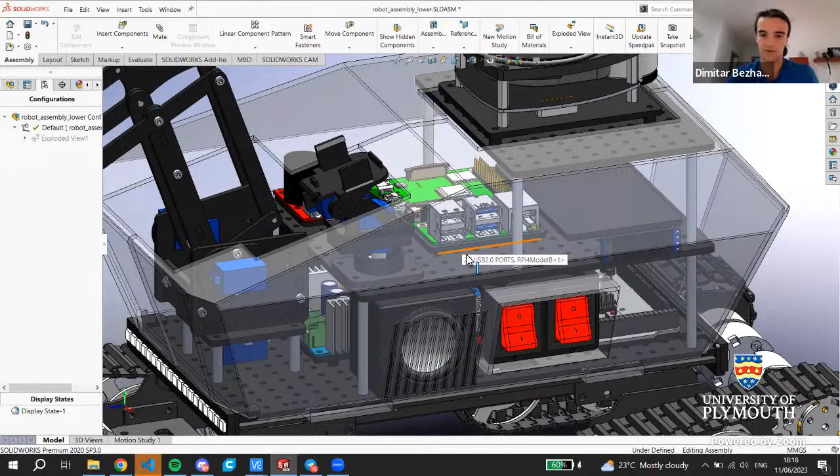So if you need the Raspberry Pi in a different place in this robot, you can just move it around basically. That's the main idea of this thing, to be fully adaptable, and you can swap out parts on the fly because everything is just held on by a screw. There's nothing glued in that you cannot change. That was the main goal of this robot.

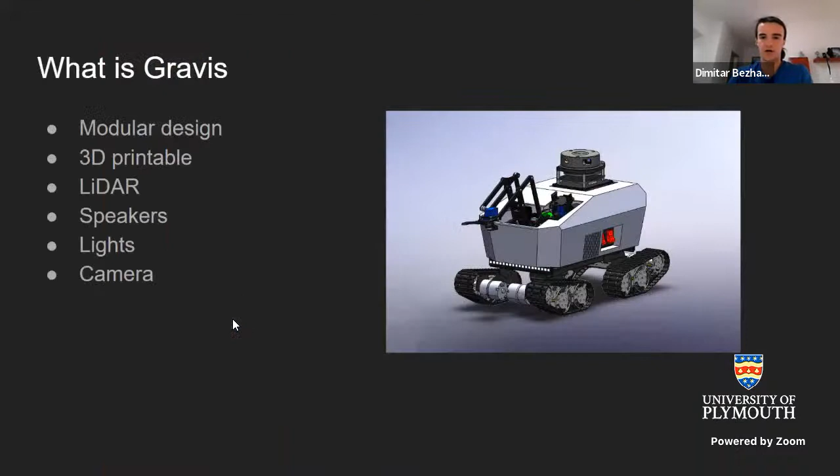I custom made the speakers, basically 3D modeled them, and I got the audio amp off of AliExpress for $3, and it's super loud for $3. It has a 3S LiPo battery, a camera, and a robot arm.

The main computer is a Raspberry Pi, and it feeds data to the Arduino or ESP32. Currently, I'm running the ESP32 to read serial data from the Raspberry Pi and control the motor controllers, LED strips, camera servos, robot arm, and everything else. So I wanted to make an interface so that everything can be abstracted off into a separate microcontroller.

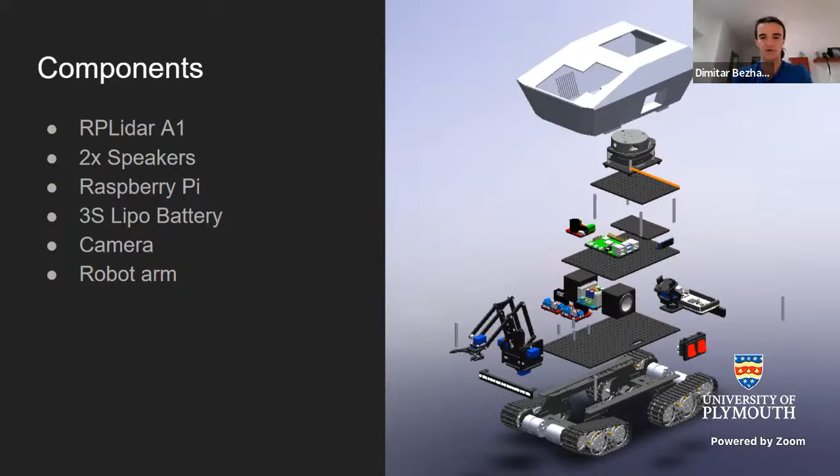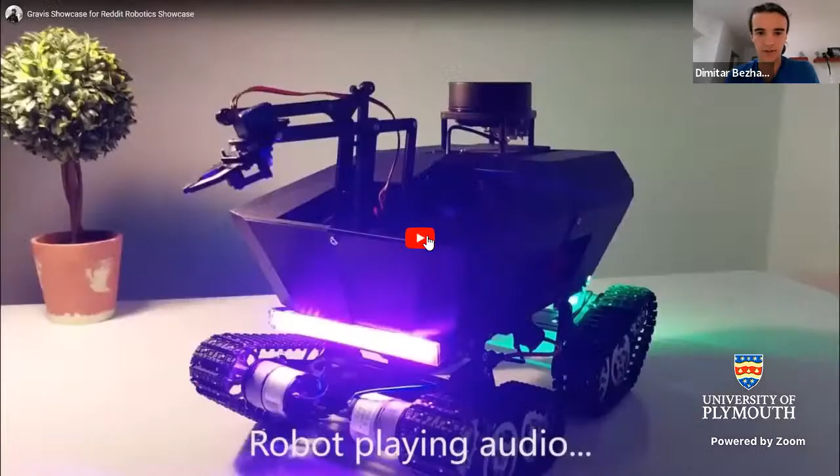So here's a video demo of the robot, which I'll play right now. Okay, let me just unmute this.

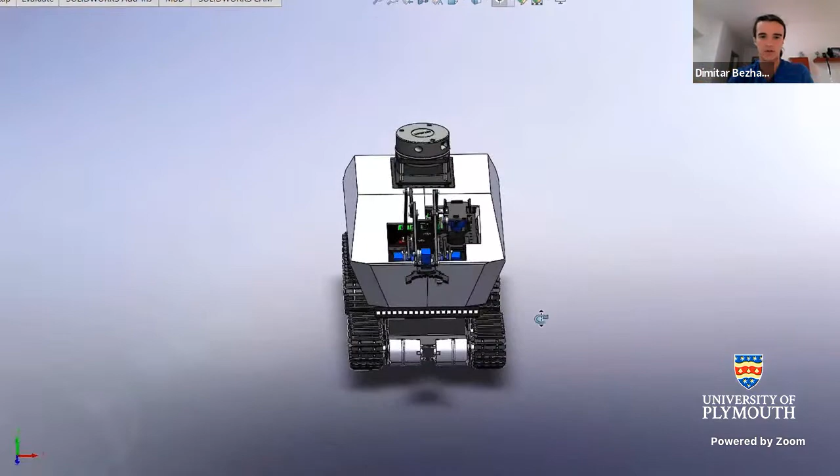Currently its autonomous features are kind of limited because it's mainly manual control. But with the LiDAR, I'm developing the autonomous mode for it, and I plan to integrate ROS for it. Currently, it has all the hardware capabilities for, let's say, autonomous navigation.

Okay, and now I'll just control it over and drive around my apartment. As you can see, it's over here in the feed. And right now the camera is a bit tilted down.

Yeah, Murphy's Law. So the camera is kind of not tilted correctly, but depending on the controls you use, the robot will drive around basically. You can drive around in manual mode, and you cannot see much from the camera because it's kind of disconnected right now. It's not tilted properly.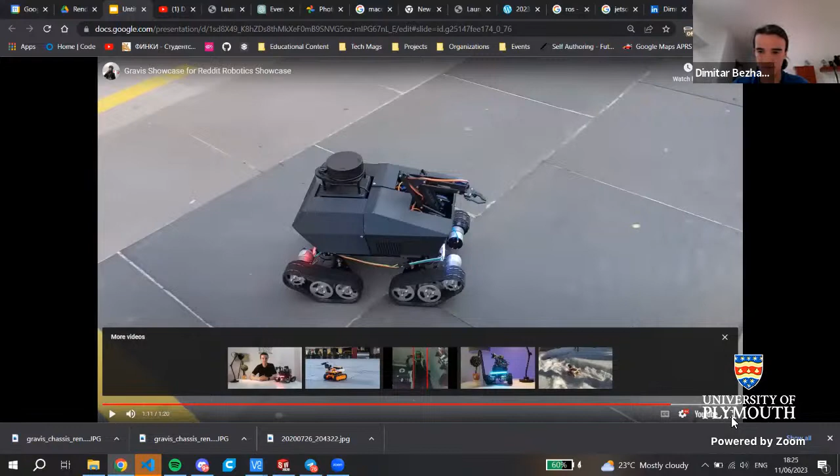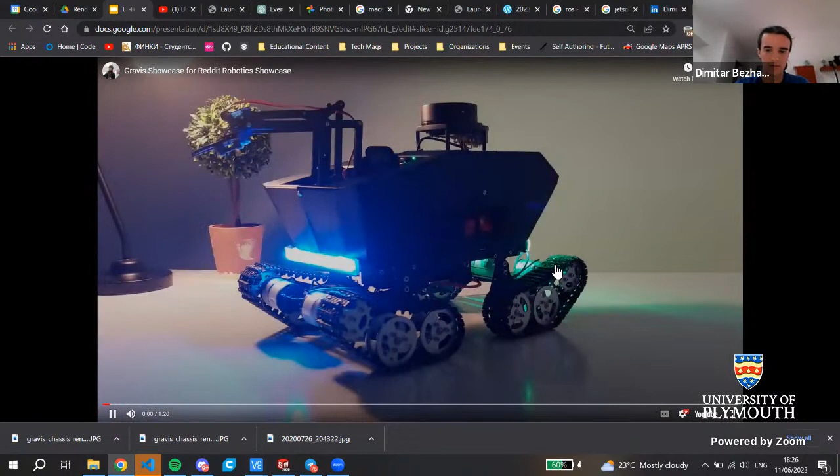So let me get back to the presentation. How do I exit? Okay. Okay, so yeah.

Future plans for this robot: I want to integrate ROS into it because currently it's running on a Python loop with 3 threads. One is for OpenCV data for image processing, the second is for keyboard listening and input, and the third thread is for real-time rendering of LiDAR data. For the future, I plan to integrate a Jetson Nano so I can run some ML models on it, and add a full autonomous mode in the next iteration. Also, I learned that hardware project management is pretty hard because there are a lot of things that need to be connected, and everything has to go smoothly.

In Macedonia, we don't really have any stocked hardware stores, so you have to order things online and there's like a one month delay. If you forget one thing, it can set you off a whole month in the project. You always have to think 100 steps ahead, and because of this, good requirements in the end will result in good results for the project.

If anyone has any questions, I'll be happy to answer them. This is also my LinkedIn, where you can contact me either about the project, any collaboration, or just if you want to chat about it. So thank you for your time, I'll be happy to answer.

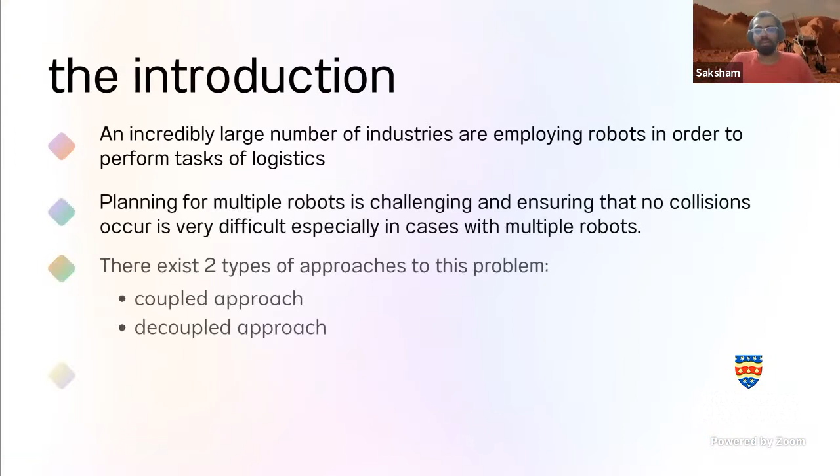Can you move to the next slide? Yeah, so an introduction to the problem that we have at hand. If you look at factories nowadays, there's a lot of autonomous mobile robots moving around. One of the biggest causes of problems is when these robots collide. The way these systems are usually set up is that once it finds an obstacle in its way, it'll just stop, raise an alarm, and wait for a human operator to come and fix it. What we want to do is eliminate that problem by making it autonomous to run these robots, avoid collisions, and adapt to newer environment changes.

This task typically has two approaches, a coupled and a decoupled approach, where you consider the plans of all the other robots or you don't. There are some existing decoupled approaches called SIPP and CBS. SIPP was presented by CMU. CBS is a complete and optimal solution that is claimed, and it is really good, but it might take too much time. What our algorithm does is try to circumvent that and take a shorter amount of time to find a path, which is better than finding an optimal path after a long time.

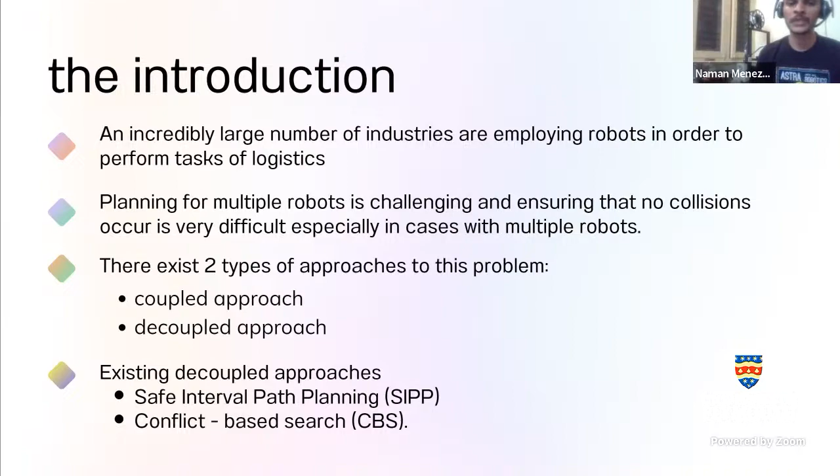So this is the problem statement that we formulate. The entire environment is discretized, so each point is a set of XY coordinates, and the map defines a static obstacle known in the environment. This is generated through SLAM or some kind of occupancy grid, which will be fed to the robot prior to its operation.

There are Ri robots with i unique start points. So 4 agents, 5 agents, 12 agents will have R12. Planning and execution is done in a frame by frame system, so we synchronize at every second. From XT to XT plus 1, we know where the robot is, and what we do is ensure that the robot isn't colliding during that T time.

So one drawback of our algorithm is we need to synchronize at every frame. We need to know where all the robots are at the end of one time frame.

Collisions is what we define. There are two ways. One is a head-on collision: if two robots are just straight ahead with each other and they hit each other, that's a head-on collision. And an interchange collision is where two robots are at two different points and they try to cross over. So one is at X1,Y1 and it's moving to X2,Y2, and the other one is at X2,Y2 trying to move to X1,Y1.

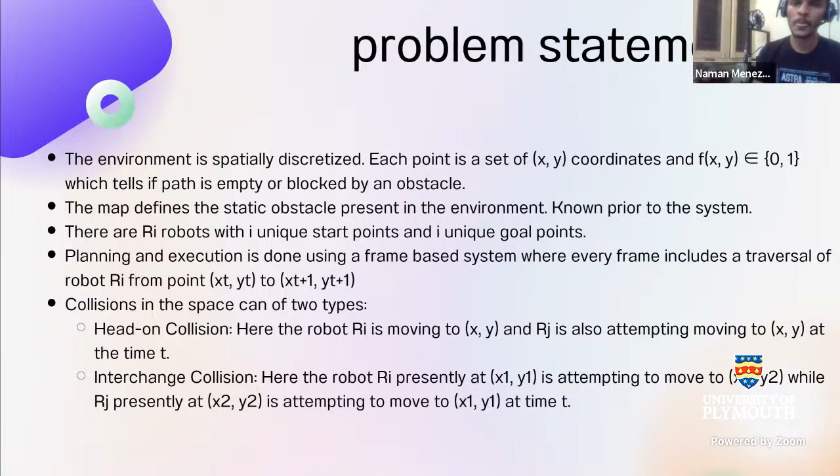Since our world is a frame-based world, we can't really assume things that happen between XT and XT plus 1—there's no XT 0.5. So to ensure that, we call this an interchange collision, and we just try to reduce these two collisions in the spatial domain. So the algorithm is going to be explained by Saksham.

Okay, so but jokes aside again,

Usually, so till now, people have tried decoupled approaches, but they've more or less tried using A-star coupled search. So one of the key improvements we were able to do was using D-star, which is able to use memory to keep certain location values when solving a path planning problem.

It'll save those values and reuse them again when trying to find a new path because some obstacle has changed. So the way we try to use that is, we talked about having head-on collision and interchange collision. So let's say a certain head-on collision happens between robot 1 and robot 2.

Now we want to avoid this. So we have set up a random priority order, so robot 1 has to be given space and robot 2 has to wait for it. So what we try to do is introduce a virtual obstacle in the path of robot 2.

Once we do that, we use the decoupled efficient recalculation method so that robot 2 doesn't have to recalculate its whole path again. Robot 1's path remains the same, but robot 2 will just change its path, saying okay, this is a new obstacle here, and that obstacle will remain for that particular time frame.

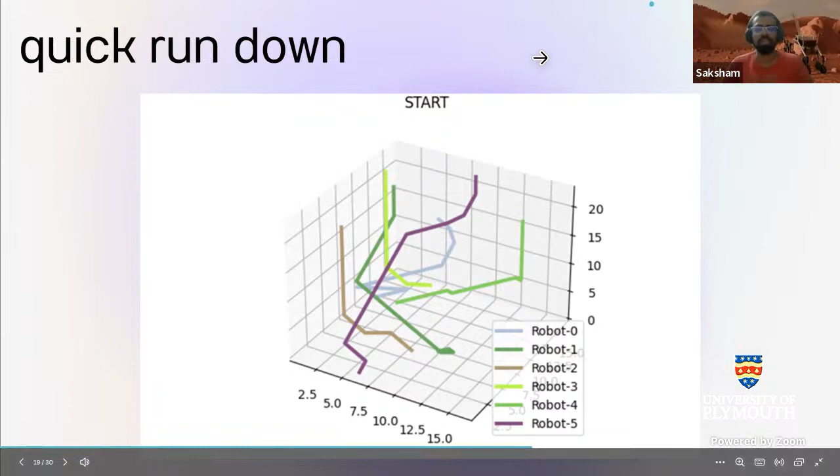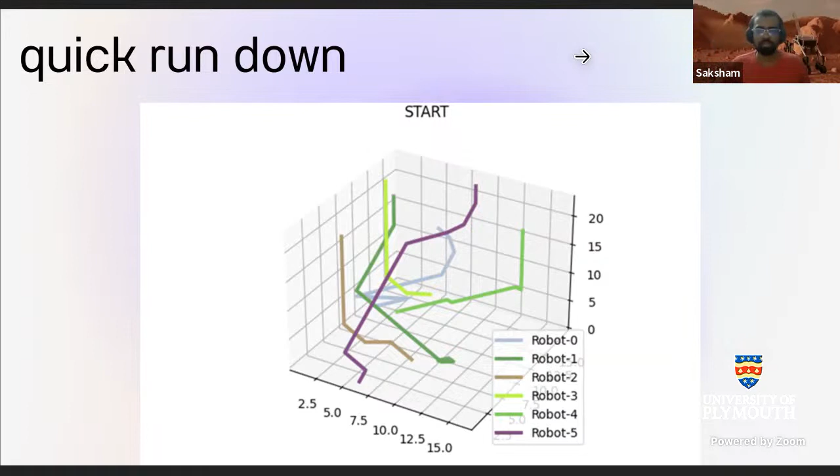So you can try these random sampling methods, which will try to see which priority order you should go for to get the best outcome for the whole system. So yeah, I think we can move to the next slide.

Yeah, again, so we try to now relocate robot 0, and then there's another collision because robot 0 and robot 5 haven't been fully solved, etc. So that was just a brief of how the decoupled approach actually happens. And Naman will showcase the initial few results.

Now, obviously, if there was no space for one robot to overtake, they both would not be able to plan. So even CBS or our algorithm wouldn't be able to plan, because there's no way. There could be a way of one of them reaching their goal first and then both of them moving together towards a new goal.

But in that case, we are redefining what reaching a goal is. It means not just touching a goal - our definition of reaching a goal is going to that point and staying on it.

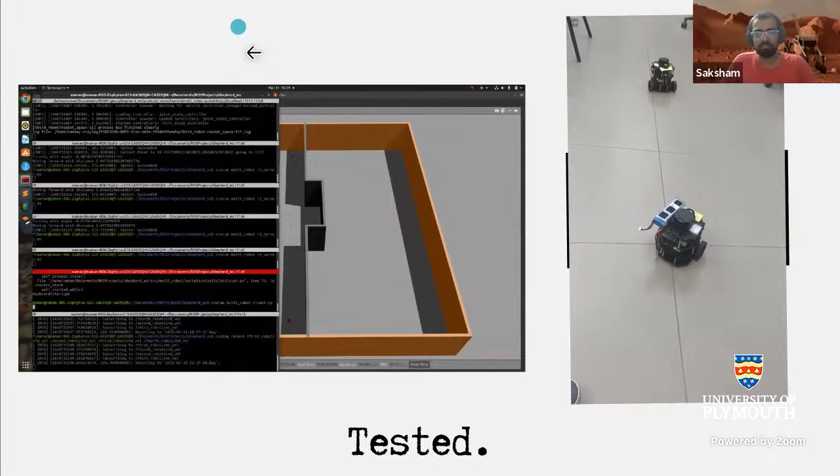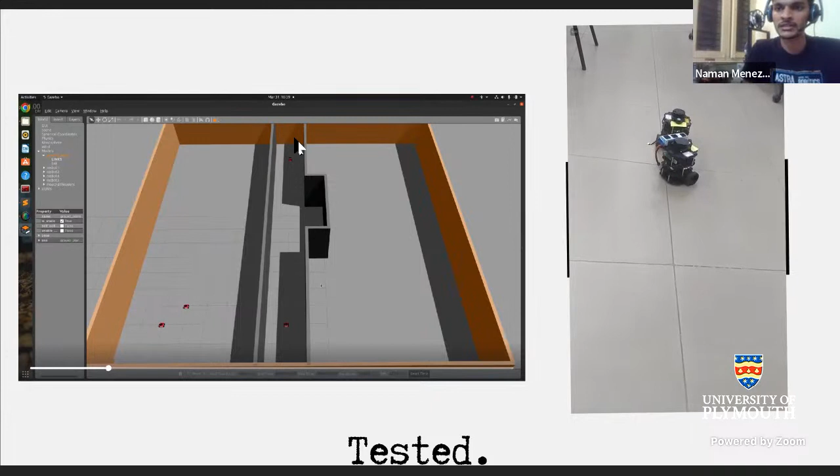These are some of the tests we did to validate our approach. On the left there's a Gazebo environment showing the same narrow corridor case we tested before. On the right side are our turtlebots, which many people would have used. This was in our lab, and the turtlebots are executing the same narrow corridor case but in real life. There's no SLAM on these systems, mainly because that's not what we wanted to show with our algorithm.

If you've used ROS, you'll know about low-level and high-level planners. This would be the high-level planner, giving an A-star based plan, and we'd use something like DWA or TEB to give the low-level controls for the robot to move. That's why you see these robots moving discretely in that same frame-based fashion.

Each robot is given a PID-tuned goal, so it's given an XY coordinate and just tries to reach that new XY coordinate. You can see that every frame is sequenced, so all the robot moves happen at the same frame time. This puts all of our pieces together: the server-client architecture and the path planning algorithm.

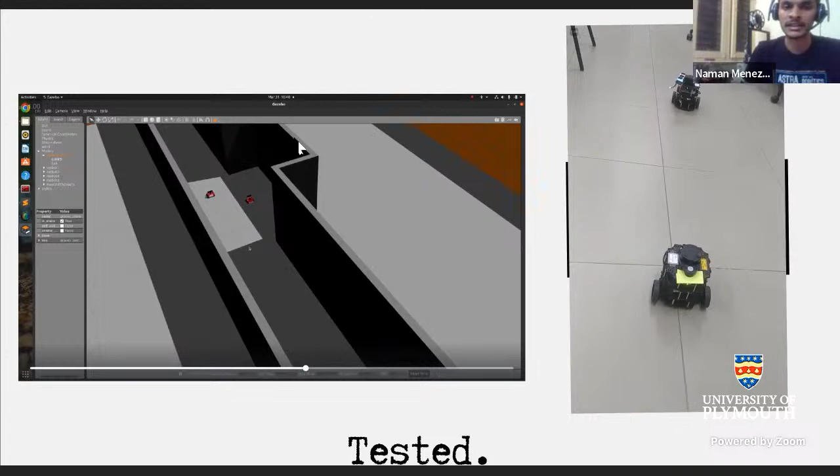Every time you run this algorithm there could be a different result, because that was the solution found first. But since we have a hill climber, we try to find the best among those scenarios. We can also just report the first successful scenario and compute the next best in the background, or if that one's better, update and say this is now the best solution.

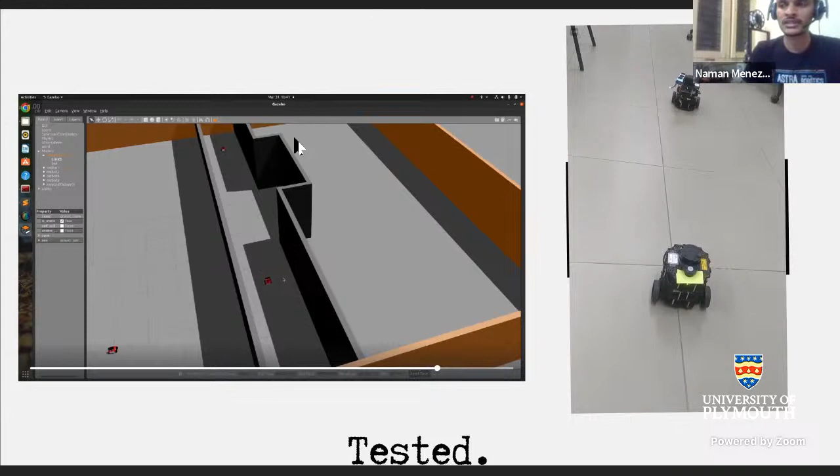What we're working on is porting it from Python to C++ to get a bit of bonus performance. All of this is written in ROS 1 right now, and even porting it to ROS 2 is something we're thinking about, because it has better decentralized performance.

Some of the advantages of our algorithm: we're up to 17 times faster in most scenarios, and we're open source. It's a centralized approach, so you know where each robot is at every given point in time. We've evaluated it across many scenarios.

There are benchmarks, and we've run it through most of the cases, averaging 10 plus runs to get our timings, so there's nothing like cherry picking the best cases. It's a decoupled approach, so you don't need perfect knowledge. It's ROS integrated, so you just clone our workspace and get the same outputs we have. Finally, we have an API that's free for third parties.

This is one of the problems we found. Initially, when testing our algorithm, we found it was taking a lot more time than CBS and SIPP. But the strange thing we noticed is that every time we ran it, it would take consistently the same amount of long time.